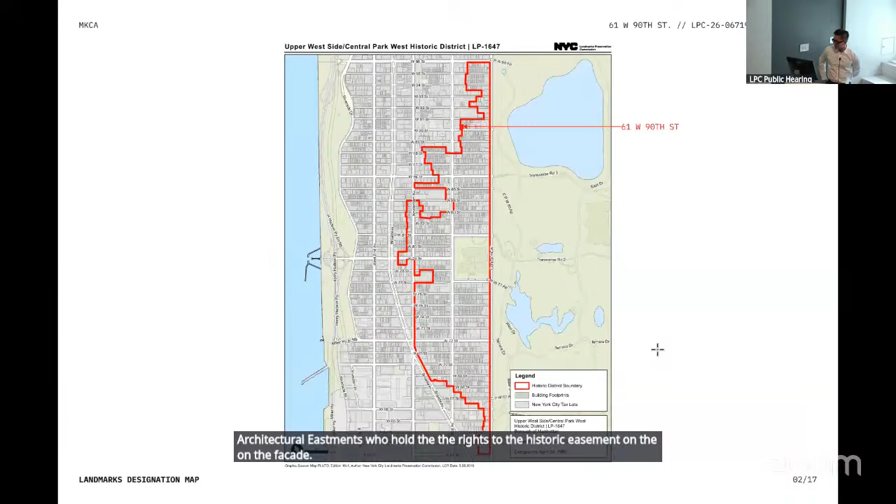The building is located in the Central Park West Historic District, between Columbus and Central Park West. Here it is in context.

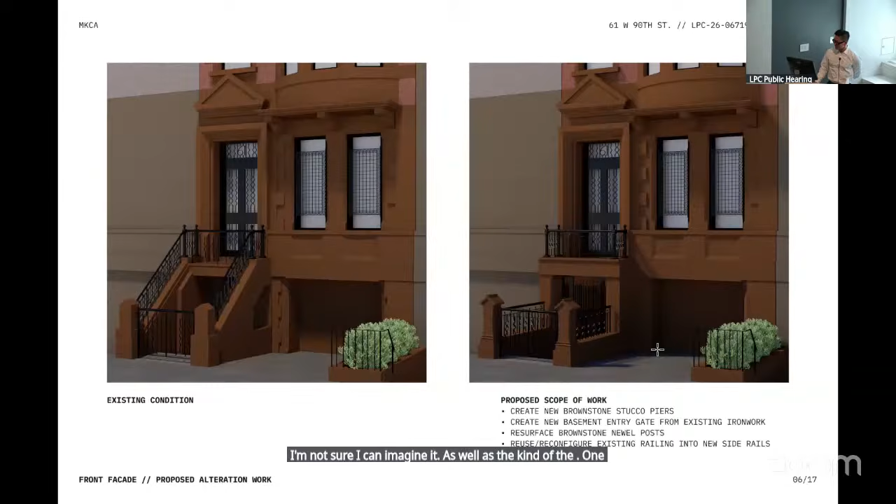So this is the proposed scope of work on the right, a comparative rendering of the existing condition on the left. We're proposing to remove a portion of the extant cheek walls and to restore the newel posts to a geometry that's much closer to the original condition, and to repurpose the original elements of the ironwork that remain into a new railing, running along retaining walls that will lead to a vestibule entrance.

Part of the impetus for this is in part to address this rather peculiar condition at the street, but also to bring the building into greater harmony with its surrounding neighbors, all of whom have basement level entries with low retaining walls and ironwork flanking them.

To go into a bit more detail into the proposal, this is the portion of the cheek wall that we're proposing to remove on either side of the railing. You can see that it's entirely a stucco construction.

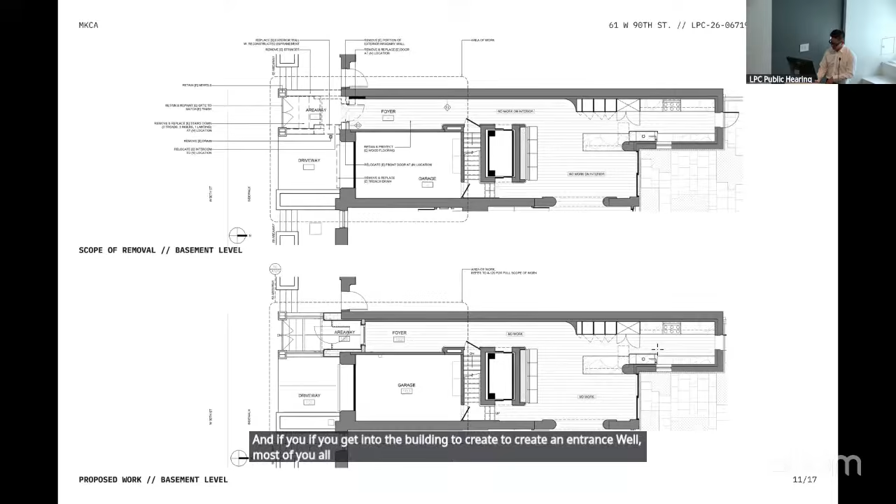And then no changes at the existing parlor level. Again, a comparison—the existing condition on the left and the proposed on the right—and I'll zoom in to the proposed geometry.

You can see that we're proposing to re-articulate the brownstone newels on the street, retain the gate, and the new ornamental grille or gate that is at the vestibule is an open air gate that creates a kind of buffer zone at the street level.

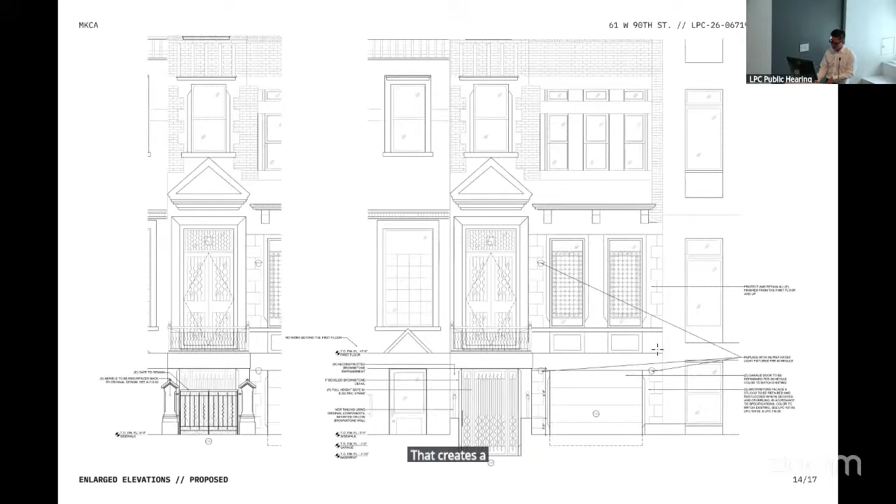And again, just an enlarged plan of the proposal. We're also working with the staff to rework the sidewalk stair down to the basement level to bring it into conformance with the correct proportions of the stair for egress. And I'll be reworking a lot of the subsurface drainage out here, which is pretty badly degraded.

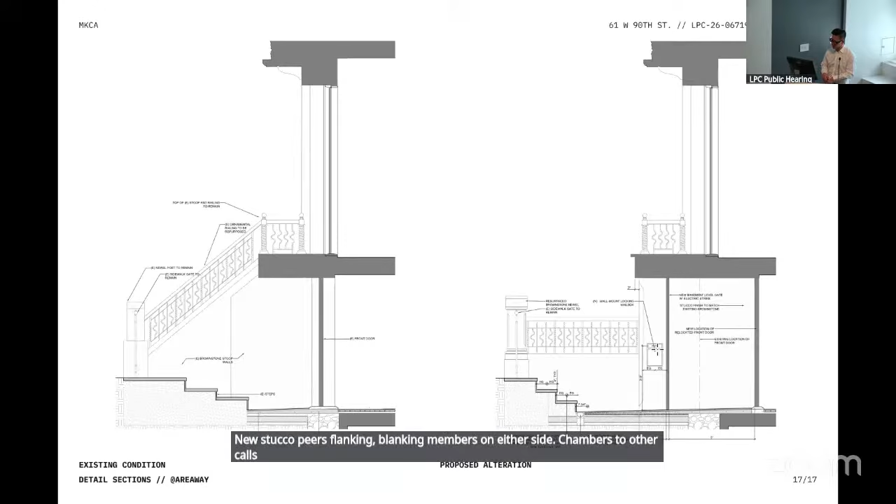And then again, a detailed series of sections through the existing condition and the proposed, and then sections through that entrance. As you can see, the recession of the front door, just to repeat the new open air entry gate, and then new stucco piers flanking the entrance on either side with a chamfered detail that recalls the chamfered corners of the rest of the building.

Those are the items. Thank you. Commissioners, do we have any questions?

Commissioner Chu: Yeah, so Michael, you can't do the traditional come around under that condition because the garage is there and you can't get down low enough on the side. So a lot of the other houses have obviously lost their stoops completely. What you're proposing is just essentially keeping those two pieces on the street edge to recall the remnant of a stoop that was there. Right. Okay.

Okay, thank you. Any other questions? Okay, is there anybody in the room who would like to speak on this item? Noting that there isn't, I'm going to turn it over to Stephen Thompson to see if we have any remote testimony. Those joining via Zoom who wish to speak, please raise your hand.

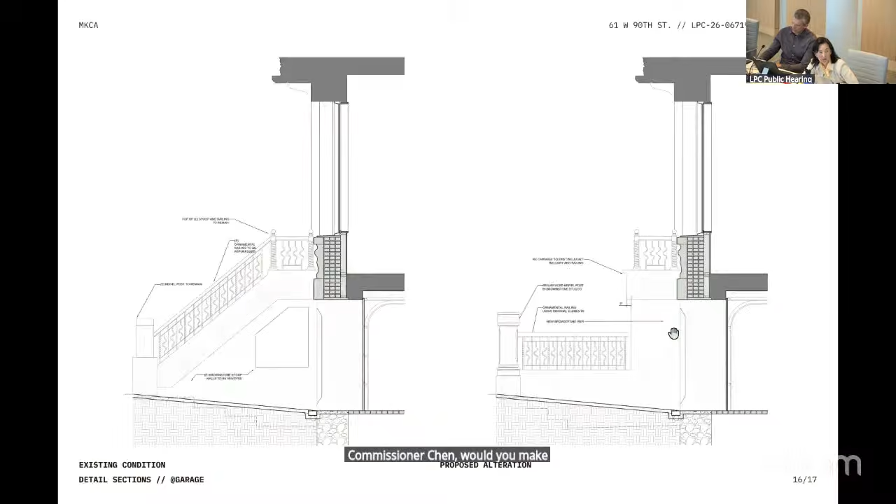Thank you. Commissioners, do we have any final questions? If not, let's go ahead and close the hearing. Commissioner Chen, would you make a motion to close the hearing? So moved. Thank you. Commissioner Mahan, would you second that? Second. Thank you. All in favor say aye. Aye. Any opposed? Okay, the hearings are closed.

Let's go ahead and start the discussion. Commissioner Wilder, would you like to start this discussion? Thank you for the presentation.

I think the work that's being proposed is taking away the form of the former stoop that used to be there and creating more of a traditional entrance at this basement level. From what I understand, there's not much more that's being changed, so we're really focusing on the alterations made at this level. I don't see an issue with the changes being proposed.

I think the newel post is fine to be restored to how it used to look. And so we're really just focusing on these cheek walls that are being removed and the railings that are retaining the existing design, or actual railings, and being repurposed. So overall, I can find it appropriate. Thank you. Commissioner Kumbe?

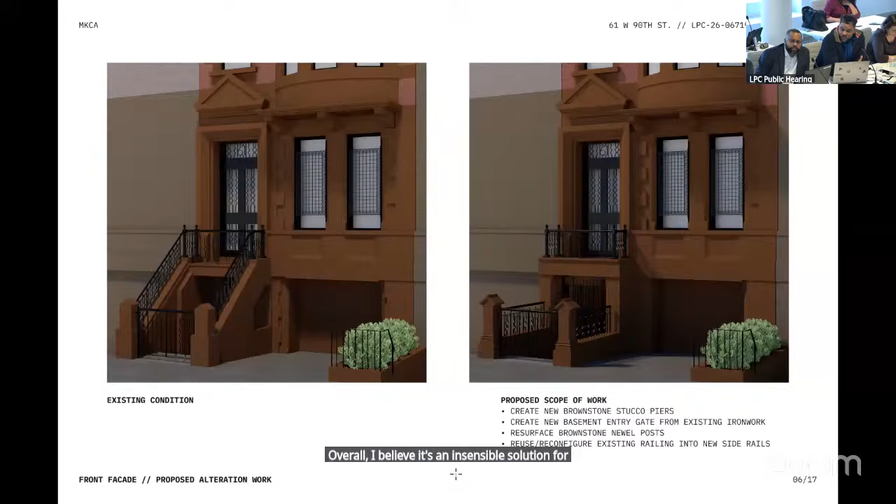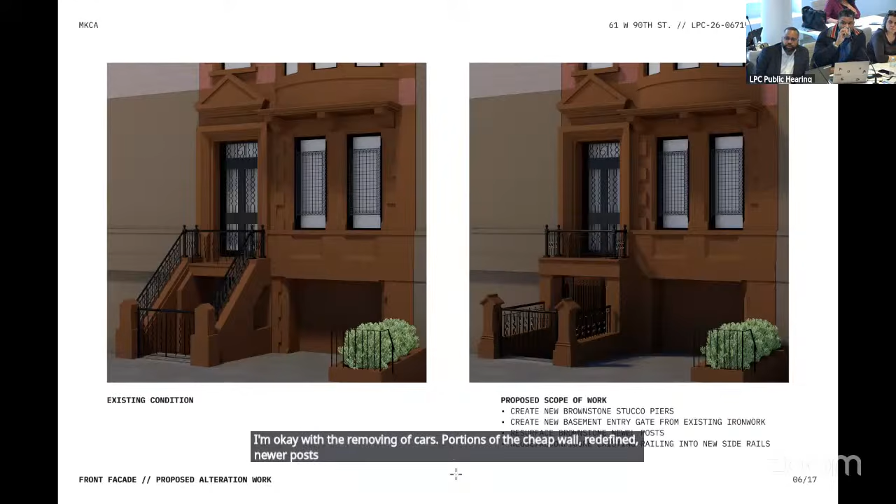Overall, I believe it's an acceptable solution, even at a designation odd condition. I'm okay with removing portions of the cheek wall, redefining new newel posts, leaving the existing gate in place. I find it appropriate. Thank you.

Commissioner Chu? Yes, I'm in agreement, I think this is appropriate. Thank you. Commissioner Jefferson? As the applicant said, a suitable approach. Appropriate. Thank you. Commissioner Goldblum? I agree. Commissioner Chen? Commissioner Mahan? Okay. Commissioner Wilder, would you like to read the motion?

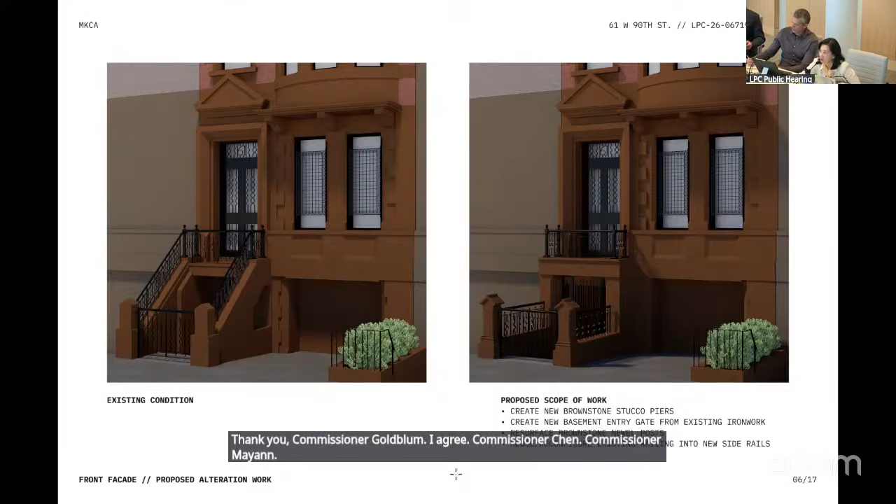Sure. In the matter of LPC-26-06719, 61 West 90th Street, Upper West Side Central Park West Historic District, a Queen Anne Romanesque Revival style row house designed by William F. Burroughs and built in 1885 to 1886. The application is to modify the stoop and basement level entrance.

I note that the building scale, style, materials, and details are among the features that contribute to the special architectural and historic character of the Upper West Side Central Park West Historic District. I recommend approval, finding that the historic stoop and entrance have been highly altered and cannot be restored to their historic configuration without extensive exterior and interior modifications.

That the house is located between two houses which no longer retain their stoops. Therefore, the removal of sections of the historic stoop wall remnants and metal railings at this row house will not diminish the unity of the row. That the proposed composition, including a shallow balcony at the former parlor floor entrance, will be in keeping with typical early 20th century alterations sometimes found at houses of this style and age, while supporting the historic...

Hierarchical organization of the facade.

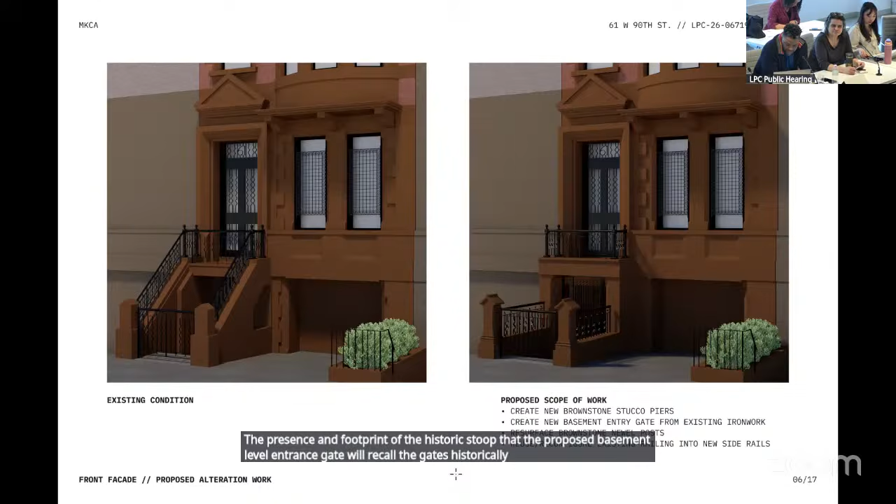That the integration of sections of the historic metal railings and the lower sections of the brownstone stoop walls into the redesign will retain portions of the historic fabric and recall the presence and footprint of the historic stoop. That the proposed basement level entrance gate will recall the gates historically found at basement entrances of houses of this age and style in terms of its placement, material, finish, and details.

That the newel posts will be resurfaced and resculpted to closely replicate the historic posts in terms of overall design and silhouette. That the brownstone tinted stucco steps and bluestone paving at the basement entrance will be in keeping with areaway paving and steps throughout the historic district, and that the work will not detract from the special architectural and historic character of the building, streetscape, and historic district.

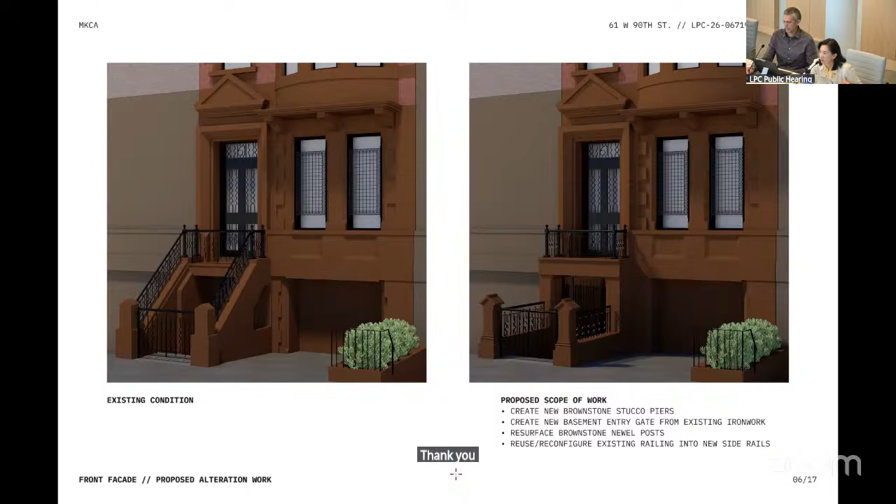Thank you. Commissioner Kumbay, would you second that? Second. Thank you. And Mark, will you call the vote? Vice Chair Master, aye. Commissioner Chen, aye. Commissioner Chu, aye. Commissioner Ginsburg. Commissioner Goldblum, Commissioner Quimby, aye. Commissioner Jefferson, aye. Commissioner Mann, aye. Commissioner Wilder, aye. With 8 in favor and unopposed, the motion passes.

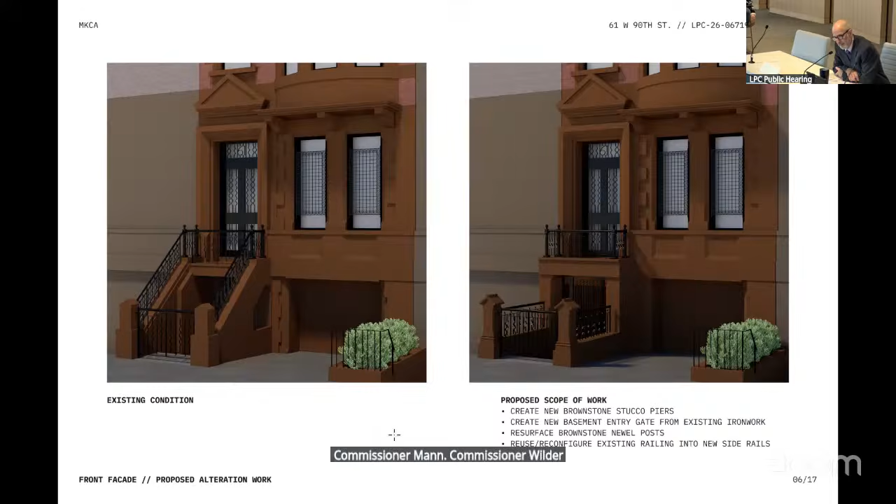That's been approved. Let's move to the next item. Next item is public meeting item number 3, LPC 25-07016, an application for a certificate of appropriateness in the Borough of Manhattan, Block 474, Lot 19, 41 and 43 Mercer Street in the Soho Cast Iron Historic District. This is a store and storehouse building, number 43, designed by Henry Fernbach and built in 1868, and a one-story garage, number 41. The application is to demolish the garage, number 41, and construct a new building, to remove the party wall and combine the buildings and replace storefront infill and construct rooftop and rear yard additions at building number 43.

This was last presented at the public hearing of February 24th, 2026. No action was taken at that time. The applicants will present revisions to the proposal in response to your comments after we open the proceedings.

Commissioner Wilder, would you make a motion to open the proceedings? So moved. Thank you. Commissioner Kumbay, would you second that? Second. Thank you. All in favor, say aye. Aye. Any opposed? Okay, the proceedings are open. You may begin. Thank you.

Hello, Commissioners and Landmark staff. Thank you for hearing this application this morning. My name is Jackie Pudu-Vallon, JPD Preservation Consulting. I'm here today with the architect, Alexandr Neratoff.

I'm not going to repeat everything that Corey just said. Commissioners last saw this application on the 24th of February. The project is a proposal to demolish an existing one-story garage and to construct a new building at 41 Mercer. And at 43 Mercer, additions and storefront alterations are proposed at the existing building. These buildings are to be combined at the interior. At the public hearing, a couple commissioners were not present, so we will briefly review some of the background information on the proposal, in addition to discussing the changes that were made in response to your comments.

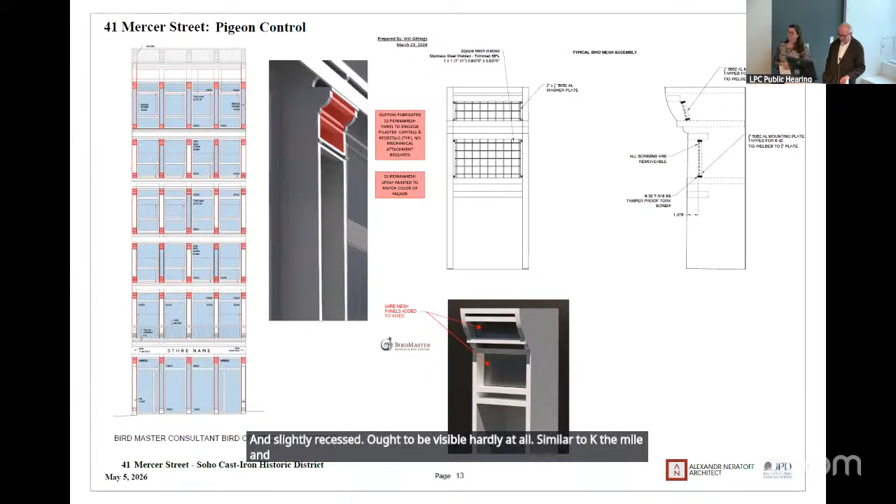The third concern commissioners expressed was bird proofing, even though Soho surprisingly does not have many pigeons. I lived there, there are very few, but it could happen. So we looked at electric strips and gel packs, all of which do long-term damage to metalwork on the facade. We found a slightly recessed grid, 1/2 inch to 3/4 inch, in stainless or stainless with a vinyl coating so it becomes dark and slightly recessed, not visible hardly at all, similar to the nylon netting used over carved stone facades elsewhere.

So the effect of this on the 41 Mercer side, that's how it looks in rendering. On the 43 side, which we'll get into, this is also all you see from the street. None of the addition above 43 Mercer is visible from Mercer Street, except along that view corridor.

Regarding 43 Mercer, the first direction set by the commissioners was to refine the atelier window details to be simpler and more industrial, and to reduce and simplify the rooftop addition. We made the atelier glazing pattern taller and narrower, extending it all the way up. We eliminated the upper level of the addition by removing the stair and elevator bulkheads and the outdoor kitchen. We pushed back the pool, all of which was a fairly difficult change because the functions were either lost or had to be pushed into the 41 penthouse side.

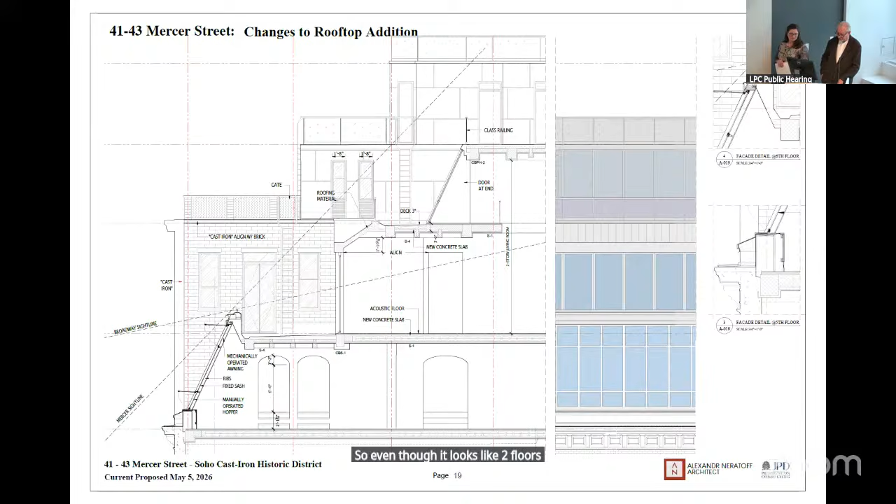We lightened the details on the two upper floors, which are really a facade for a two-story living room. So even though it looks like two floors, it's really like a floor and a skylight. You see in section there's a vertical space behind it.

Keep in mind that everything above the atelier window is seen 270 feet away, 75 feet lower than this, and it's viewed through a glass wall and eight trees. So there's really very, very little that you can understand from this, the only distance that you could see this.

The atelier window changed the proportion of what would be seen as an early 20th century volume, while simultaneously lightening it and reducing the relative size and complexity of the upper one-and-a-half effective floors. No one will see this view except from a drone with guidance, but anyhow, you see the relative proportion will change.

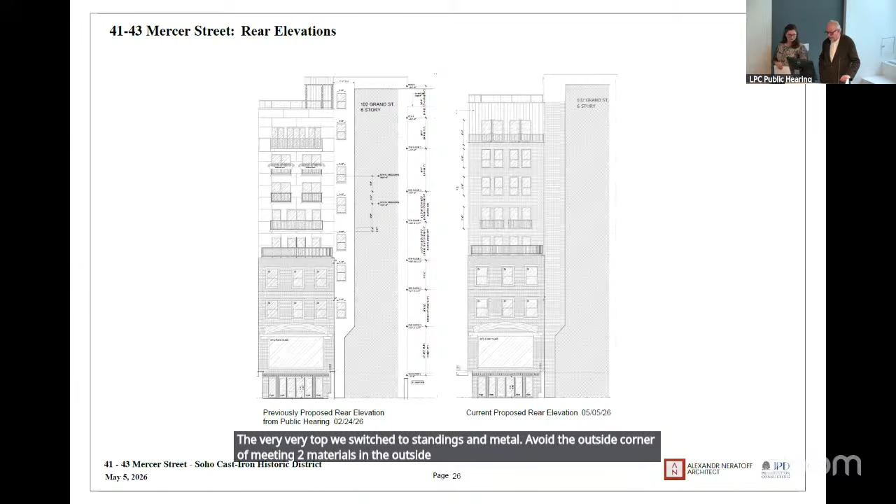So a much lightened look, but it looks more traditional.

The storefront: one of the recommendations commissioners made was the addition of the bulkhead. Some other comments were about getting rid of the side lights on the original doors and simplifying and filling up the gap above the store name.

Underneath the cast iron arch lintel, which we think is there—you see a little evidence of it—it's been filled in with some brick. So we extended the columns vertically up, extended the front portion up, pushed the pilasters to the side a little more, and now we have single doors in the two openings. Much simpler.

And the same view, but in a rendered form, before and after.

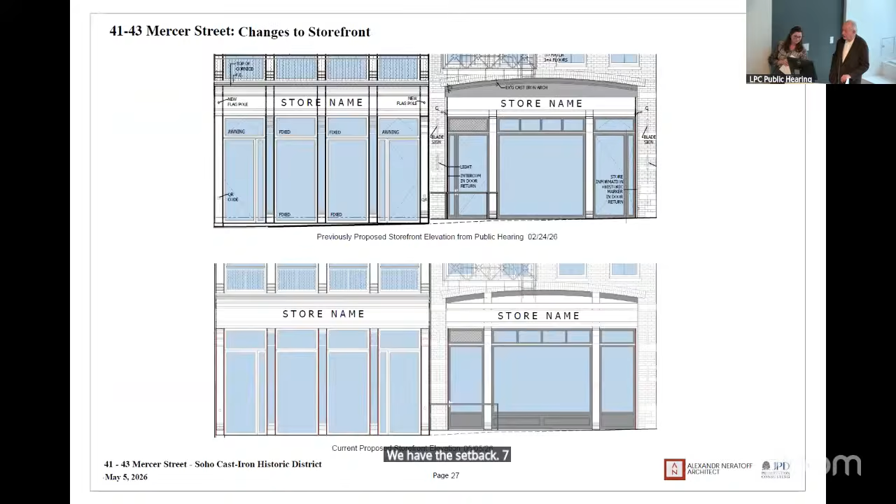Well, for zoning reasons and also for proportion of facade reasons, we have to set back the 7th floor level. So it's a two-story penthouse, clad in the same material. The upper one is set back because it has to be much smaller, since it needs to be less than a third of the roof square footage. So it's set back a little further than the 7th floor.

Actually, you know, it's relatively simple. There were also fire department requirements, and we needed space for the mechanical equipment. We lost the bulkhead on the 43 side, pushed it everything into 41, so we had a smaller footprint to work with for mechanical equipment.

At an angle, again from the street, it's really not visible. So it's prominent here, but if you look at the study we did—a Google satellite study of Soho—every second building, if not 2 out of 3, have additions that are enormous.

Soho being what it is, narrow streets, continuous streetscape, it is unusual that all the additions on top are not visible on the street. So following that pattern, what we propose, I think, is fairly delicate compared to what else is up there.

You mentioned the rooftop mechanical equipment. Does that not need to be screened by current zoning? We don't think so. It's partly screened. There's a glass railing around the perimeter, so I don't think it needs to be screened to the full height.

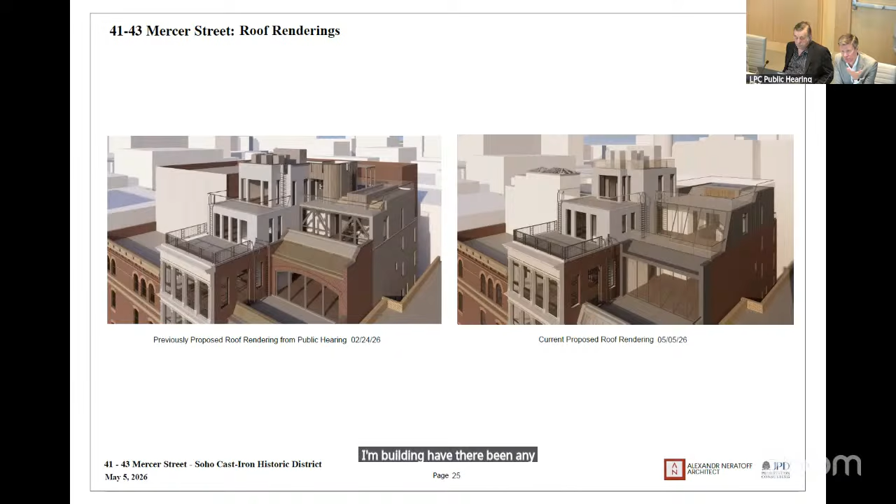At the public hearing, I remember your presentation clearly. It was very interesting, with all the various references to art and artists in the neighborhood. There was some discussion about the profile, the detailing, the design, the opaque versus transparent character of the pilasters in the 41 building. Have there been any revisions or refinements to that element?

No, we maintained that portion. Transparency is something somehow associated with a more modern view, and our encrypted classical version is really the fin. So theoretically, everything except the fin is modern. We don't take credit for that—maybe take credit for identifying it—but really Soho, historically, evolved from imitative work to a more modern version of itself. Later Soho buildings use the pilaster as an encrypted form of classicism on a budget. So we based our idea on this more modern view of late Soho architecture versus early Soho.

Any other questions, commissioners? Commissioner Jefferson? I understand the penthouse on the roof, but I'm a bit concerned about the scale of it, and my computer's not working right. What's the scale, floor to floor, of each of those penthouses?

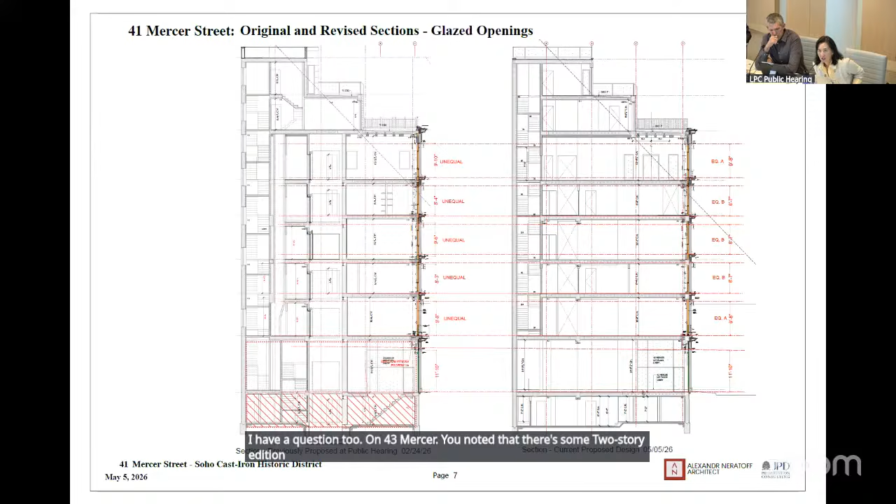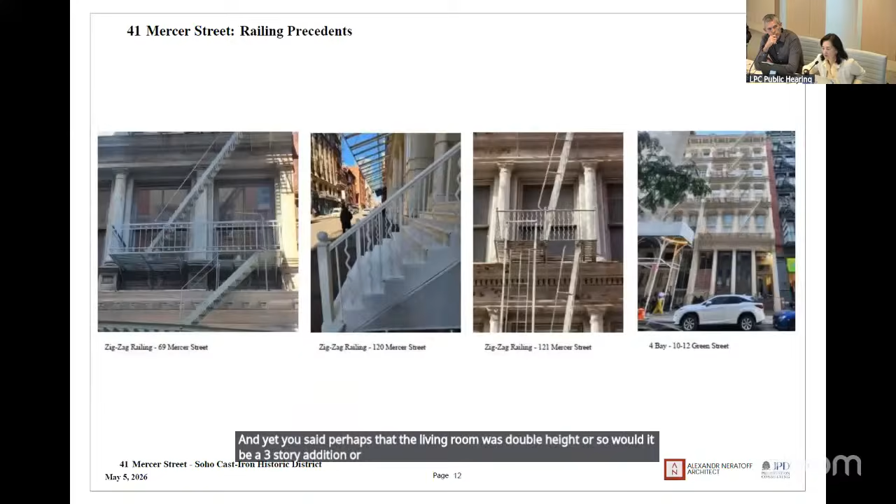I have a question too. On 43 Mercer, you noted there's a 2-story addition, and yet you said perhaps that the living room was double height, so would it be a 3-story addition? Well, it's the 5th floor—it's an addition, yes, but I'm considering it visually part of the historic fabric. So it's really a 2-story addition on top of that, technically speaking, a 3-story addition. The upper 2 floors, however, are a 2-story living room with a little mezzanine bedroom behind.

So even though it's broken up into a straight glass section and then a slanted glass section, behind it is a 2-story living room. Because the upper floor is slanted, it really is a skylight—it looks like a skylight and functions as a skylight to a 2-story space.

Thank you. Commissioner Jefferson: You're essentially not adding floors, you're creating larger spaces within the so-called addition—am I reading that right? On 43, well, that's all new, yes, everything above the red is new. If you have a floor and then the space becomes double on the inside, you're creating a new space inside, correct? Well, that is new space, yes, but it's a tall new space.

This is where the grand stairway to the upper floor is, and on the rear portion is a bedroom. So you're just trying to imagine this is a mansion, really. Yes. It's not just a floor added that's subdivided—you're adding a mansion of spaces. Yes, we are. This is new space. Okay, thank you.

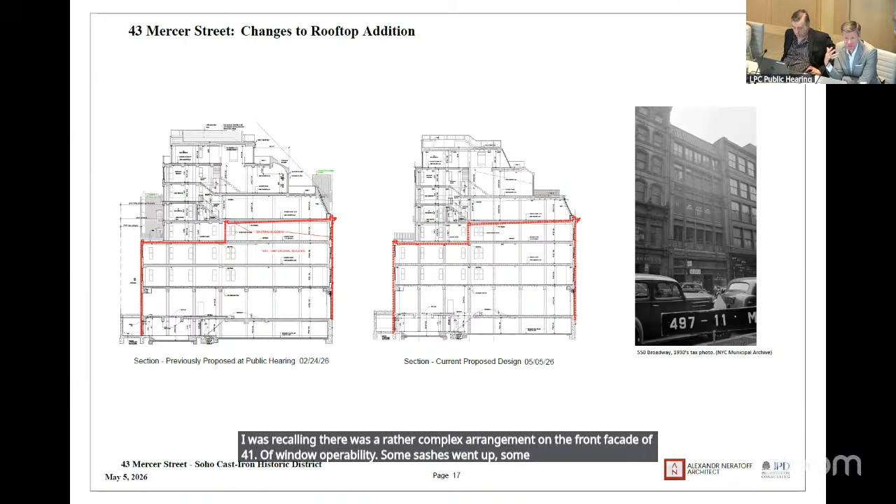Commissioner Mahan, and then Commissioner Chu. At the public hearing, I was recalling there was a rather complex arrangement on the front facade of 41 with window operability—some sashes went up, some sashes went down, some other things like that. I don't quite recall exactly. Has there been any refinement or changes to that?

Yes, it's simplified. Windows 3, 4, and 5 are really double hung windows with unequal height sash, but they're double hung windows. It so happens that the 4th floor one can actually move up instead of moving down. On the other two, the upper sash moves down. But that's a characteristic of double hung windows, traditional or new ones.

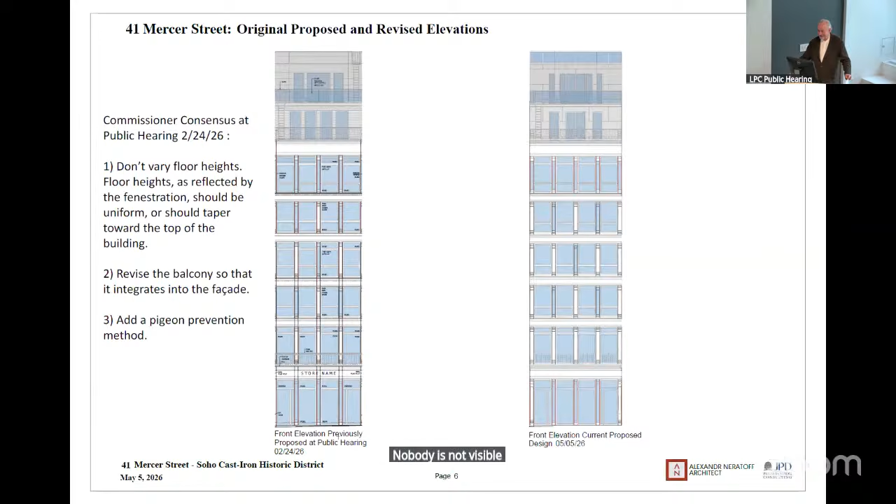They're still not consistent operation. No, but it's not visible. They look exactly the same. Wouldn't it be visible in the open condition? The open condition, yes.

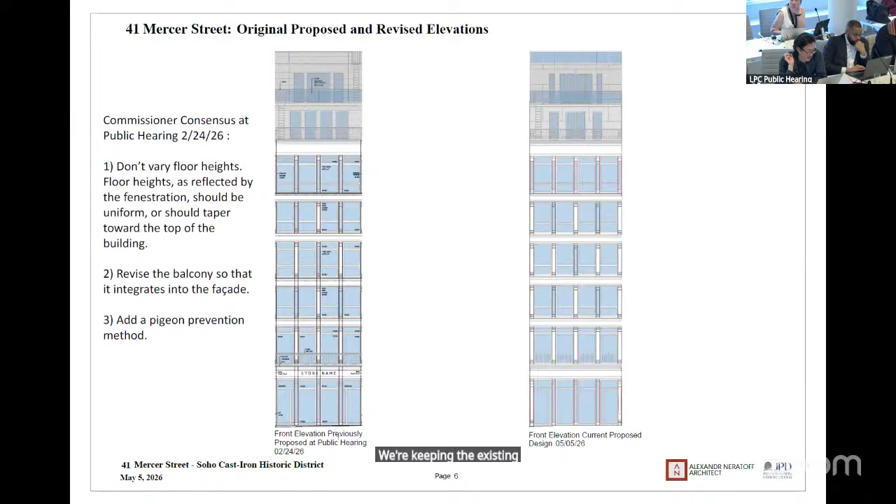Thank you. I missed this on the first public hearing, but I did have a question on 43. We're keeping the existing building facade and structure. I'm just trying to understand the exact scope. The 43's facade is being kept. All the exterior walls of 43 are being kept.

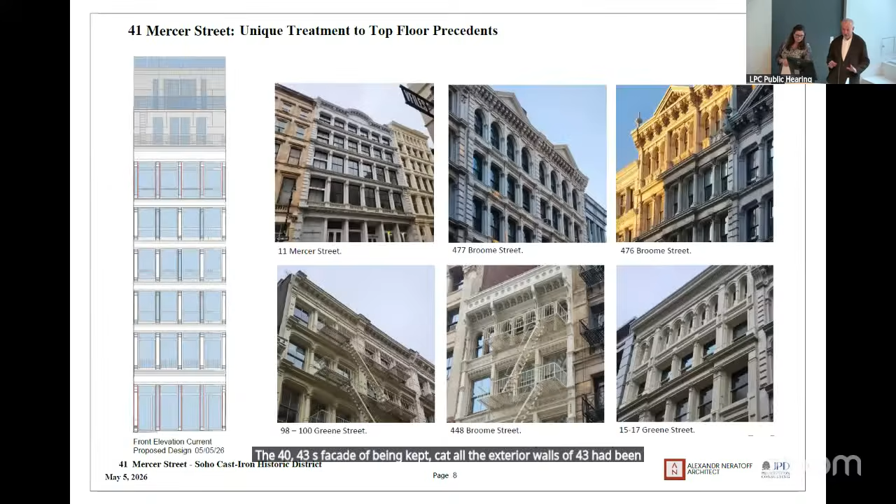Sort of, because the back of the building, the existing building is three stories in the back, four stories in the front. Correct. So we're filling all that in with a totally self-supporting new structure that's not touching the existing one.

Okay, and then in plan, I didn't see a plan. Are the two lots linked or are they separate units? They're linked, 41 and 43. The south wall of 43 right now is in very poor condition. We are replacing it, but we are replacing it with a poured concrete wall that happens to be our shear wall in the building.

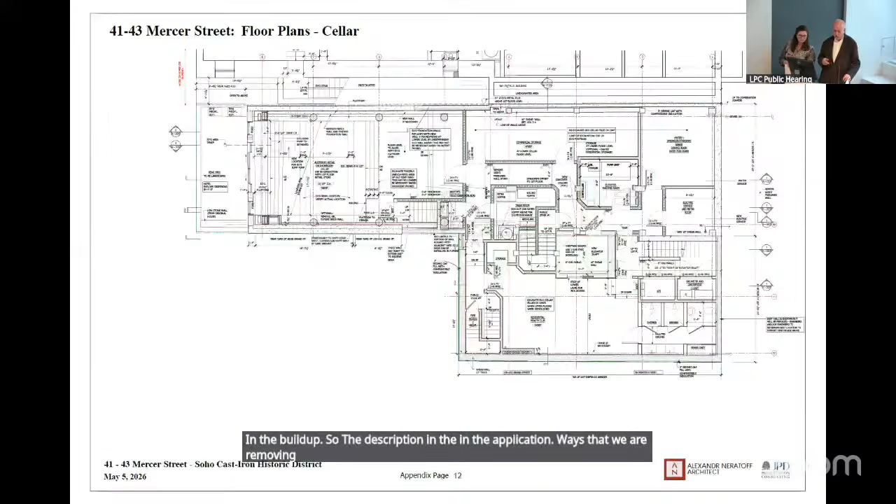So the description in the application reads that we're removing that wall. We're removing and replacing that wall with a solid concrete wall. So the wall that's between the two buildings, next to the elevator, that runs towards the street, that's a new, very thick concrete wall.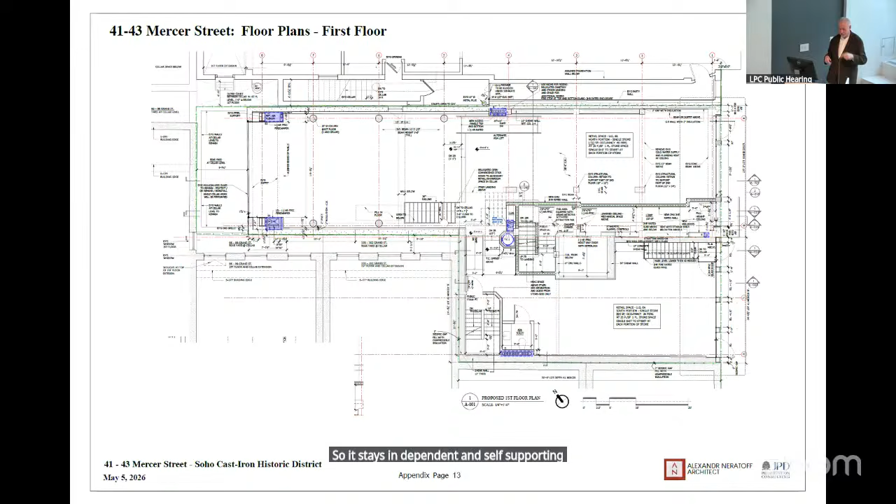The party wall. It's a party— it was never a party wall, it's actually a double wall always. Right, it's now becoming a very thick concrete wall that replaces the existing brick bearing south wall of 43, and therefore it maintains the rigidity of the 43 Mercer facade. So it stays independent and self-supporting, and the structure bypasses all the historic fabric of 43.

Okay, so the units actually connect through. Yes, okay, they go all the way through. Okay, thank you. Any other questions?

Okay, so let's go ahead and start our discussion. Commissioner Goldblum, would you like to start this discussion? Sure.

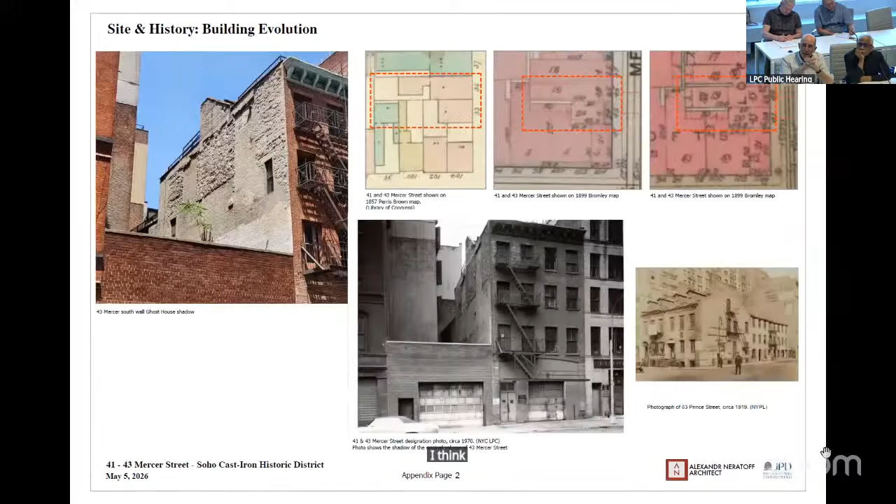It remains an interesting application. I think that it's generally appropriate. I think that the improvements to the storefront on the right side building are good, simplified, more distinct from the left side building. I think that the argument about regularizing the floors

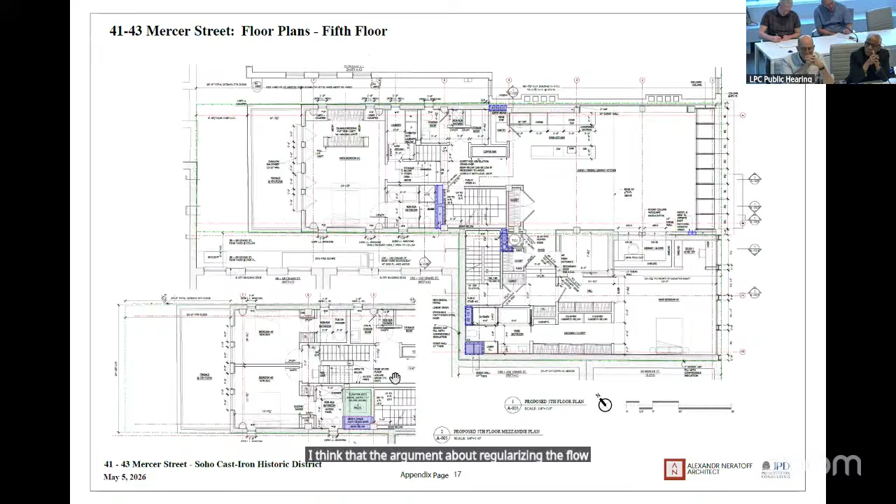works except for on the top floor. The examples shown of other buildings that had taller top floors had top floors that had a very distinctly different design to them—arched, or smaller proportions, or bigger. There was something very, very different about them. This particular design is drawing on a much different strand of the Soho universe, where I think that top floor just looks odd because its design is the same as the lower floors, but the proportions just kind of go in a different direction. So given that the design is the same more or less as the lower floors, I think the height should be the same as the lower floors as well.

I think that the rear facade of the right side building is much improved and is appropriate as is. I think that the north light design is improved as well. My only suggestion, happy to hear what others say, is I think that the tip-top floor of the right side building, which is that double height space, could be pushed back further. I think our general policy has been to try to keep rooftop additions to the minimum, and it seems like for a grand stair double height thing, it probably could be reduced without harming anybody, and it would just be more in keeping with other approvals.

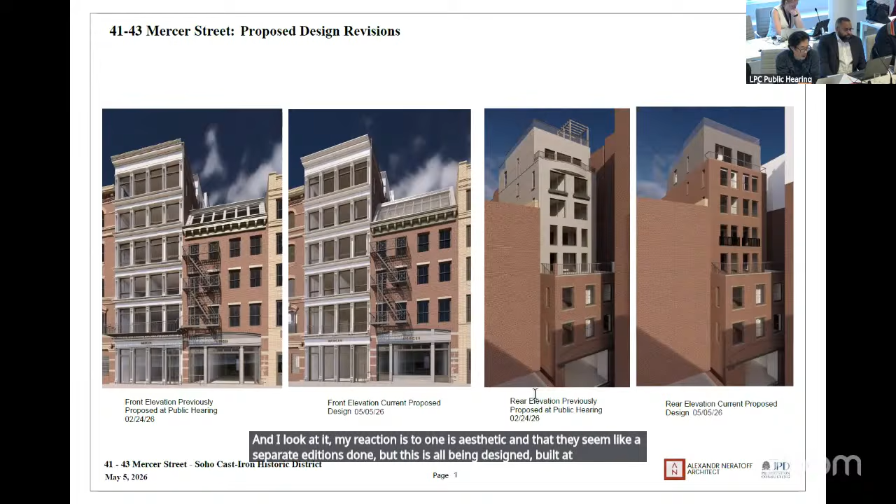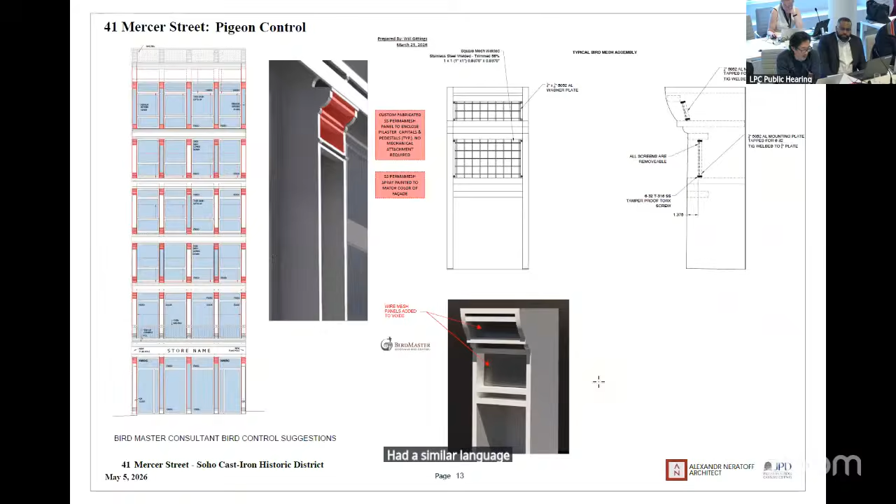I do think that since this is essentially more or less a new building while retaining and restoring the facade, the additions being the mansard roof or mansard floor, as well as the double suite on top, would from a design perspective be more aesthetically in keeping with each other. My reaction is twofold: aesthetically they seem like separate additions, even though this is all being designed and built at once. I actually preferred the simplicity of a precedent that was shown, I think it was 53 Mercer, where the two-floor addition had a similar language. It felt like a unified addition to an existing building, which in fact is what this situation is. I think this one is overcomplicated in its profile and detailing.

I also think that it is slightly too prominent in mass. I would leave it up to the applicant to find a solution to either simplify the facade or its sense of mass. I think Michael's comment about pushing it back makes sense to me. I think that's one way to do it. It's sort of like they created a courtyard up at the top. I would just get rid of the front piece and push it back and keep the same sloping language that the mansard below has.

And pushing it back would reduce its visibility as well. Other than that...

I do appreciate a slight modern interpretation of the cast iron facade. The fin language is interesting but curious to me. Some renderings, I just think this needs to be checked very carefully from a detail perspective, because some of the plate conditions could look quite messy in actual realization. I also am not a big fan of putting netting inside those reveals. I think it's going to look terrible. In that situation, I would propose putting a plate that sets back and just having it consistent with the aesthetic of the whole detail. Those are my comments.

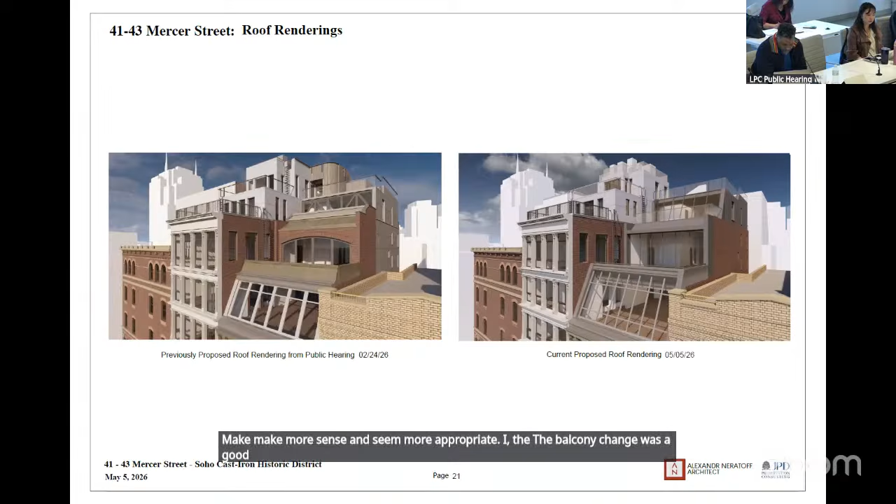I agree that the storefront changes at 43 make more sense and seem more appropriate. I agree the balcony change was a good move, as well as the design of the rooftop addition and simplifying it, making the overall design a little more cohesive than what was there before.

I think I do have a problem with the overall height, as it does almost seem as if it's doubling the existing building. So because it is a double height space, there is some room to reduce the height, and I would suggest that the applicant take a look into that. Those are my comments.

Thank you. Commissioner Ginsberg? So in general, I agree with my fellow commissioners. I think Commissioner Chu's suggestions are pretty much in line with where I'd be, except I don't like the column detail, the idea of the plates. The mesh may be all right, but I also don't think it'd be the end of the world if it was back to what was originally, and potentially put spikes to prevent birds from nesting, or just let the birds...

nest. I'm not sure that's so horrible. It's probably not big enough for hawks, which I know is what the city birders really like. But I just think the solution may be worse than the problem. So following largely what Commissioner Chu and my fellow commissioners said, I think we can get to a good solution.

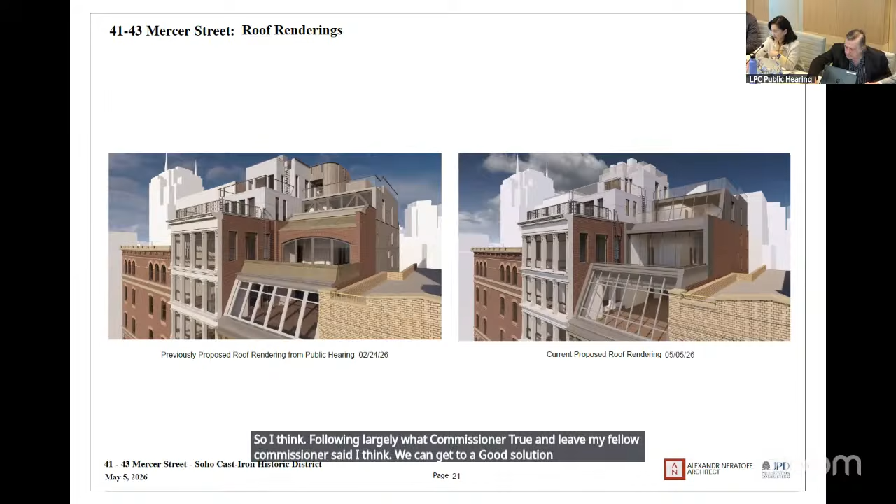Thank you for the presentation and the revisions to simplify the design after the public hearing. I struggled with this application last time, and I continue to. And for me, it's about more fundamental issues than, let's say, the birds, to pick on one example.

I fully support and want to see new development in historic districts, and I think the contemporary interpretation of historic architecture is an entirely appropriate way to do that, if not the only way. I struggle with the way that approach is executed in this proposal. I find it to be neither contemporary enough nor historic enough, and I find the contemporary interpretation to be a kind of misinterpretation of Soho architecture.

Perhaps I don't know how many folks spoke about the bird issue at the public hearing, but my issue was with the geometry and the expression of the pilasters, not so much whether birds could roost within them or not. There was a kind of another building's profile that was scanned, then scaled, adjusted, and interpreted. The relevance of that other building's profile I find questionable. And then what is the result? I think the amount of interpretation perhaps is not enough, or perhaps the source material is not the right one.

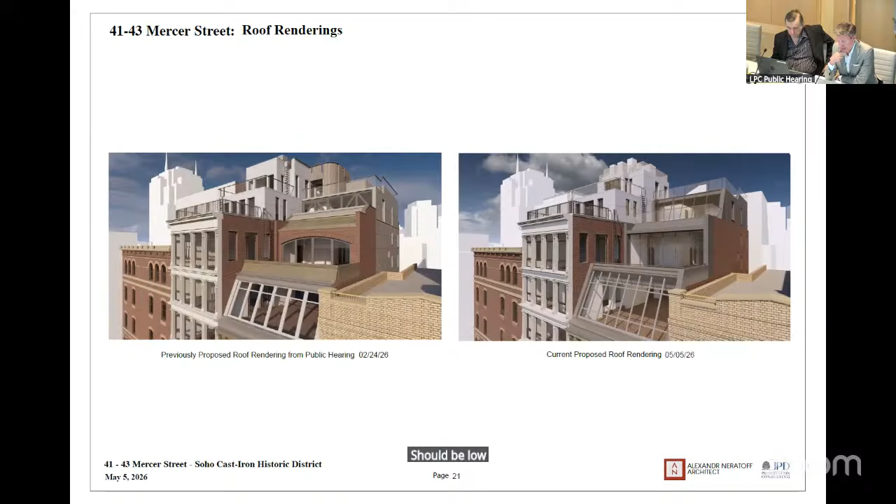As to the other issues mentioned by the other commissioners, I agree the top floor of 41 should be lowered to match the floors below it, while I'm okay with the second floor being taller. I find the rooftop accretions of both buildings to be problematic. I think there's too much on 41, and when all is said and done, the mechanical equipment, somewhat oddly behind a glass rail, is going to be fully enclosed because of zoning regulations, and this building is going to look even taller. And then I think the rooftop addition on 43 is too much and should be reduced in scale via the elimination of one or more floors. The rear facade is much improved from last time, and is okay as is.

Thank you. And Commissioner Chen? Agree with many of the comments of the fellow commissioners. I thank the applicant for refining and listening, but it's not quite there yet.

I have no problem with the rear facade, I think he made a nice improvement over it. I agree with the commissioners about the height of the second floor, it could be taller, consistent with the historic pattern in this area. What's been alluded to is obviously the top and the detailing. It needs to be tweaked and adjusted, and so I will not add to the difficulty, because there are many different permutations that can be derived, but I don't think the top is quite there yet, and I will not confuse the discussion any further.

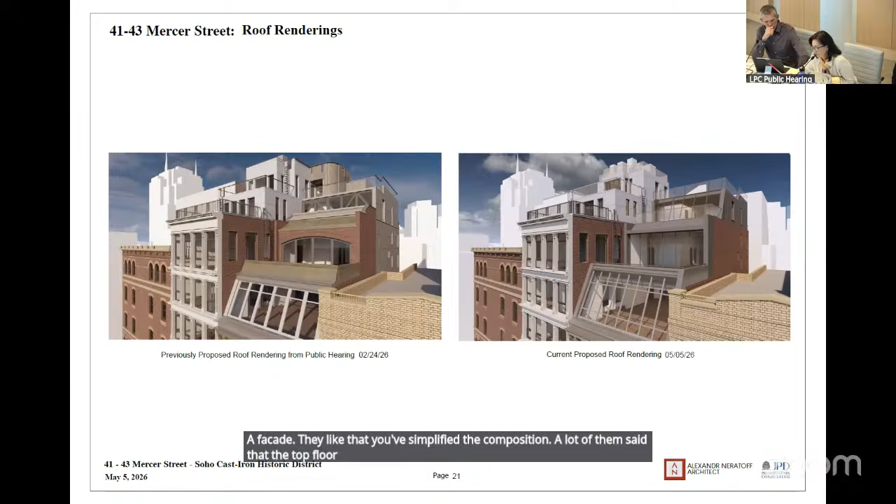Okay, so I think what we're going to do is take no action, but the commissioners have been very positive about the storefront design and the rear facade. They like that you simplified the composition. Many said that the top floor on 41, the height should be regularized. And a lot of the issues really surround the rooftop addition on 43 - whether it's being simplified, pushed back, or lowered by one floor. So perhaps you can work with staff and we can bring you back at a later time.

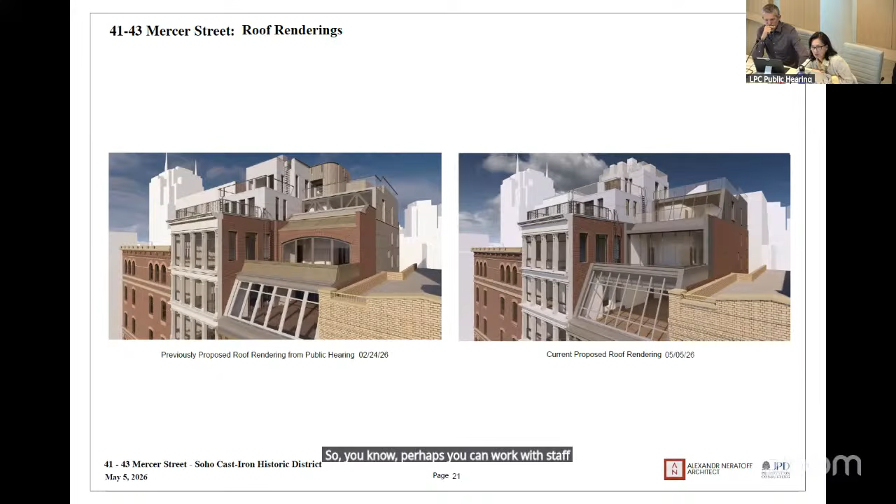Okay, we'll now move to our public hearing agenda, starting with public hearing item number one. It's LPC 26-08142, an application for a certificate of appropriateness in the Borough of Brooklyn, Block 241, Lot 123, 10 Pierrepont Street in the Brooklyn Heights Historic District. This is a neo-Renaissance style row house designed by J.C. Cady and built circa 1895. The application is to install an areaway lift and construct a rooftop bulkhead and railings.

Good afternoon, Commissioners. My name is John Shippers. I'm here with my colleague, Jen Balut. We're from Steeringhouse Design and Development, here to talk to you about 10 Pierrepont Street in the Brooklyn Heights Historic District. This is a project near and dear to my own heart. It's my childhood home, so I know it intimately. Jenna has done most of the drawing, but given my connection to the property, I'm going to present today, and she'll be on hand to answer any questions.

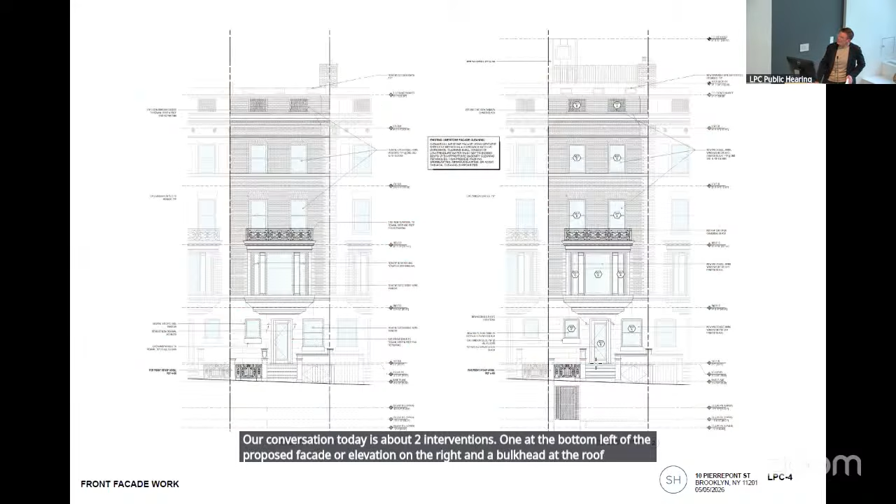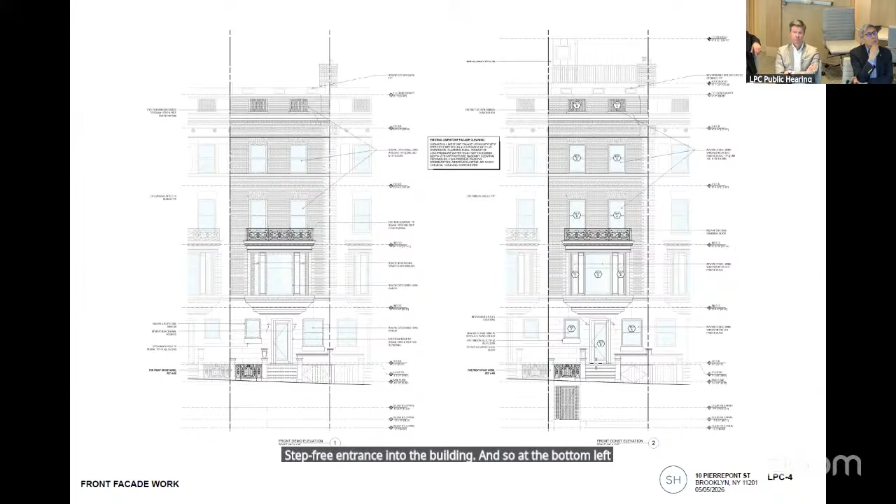And here is our proposed facade work. Much of the work is restorative and being managed at staff level. Our conversation today is about two interventions: one, at the bottom left of the proposed facade or elevation on the right, and a bulkhead at the roof. Let me point out that this is a non-traditional stoop condition on a row house, as there is not a traditional garden floor entrance. We're trying to deal with accessibility issues, because currently there is no way to provide step-free entrance into the building. So at the bottom left, we are proposing a mechanical lift providing access to the cellar level.

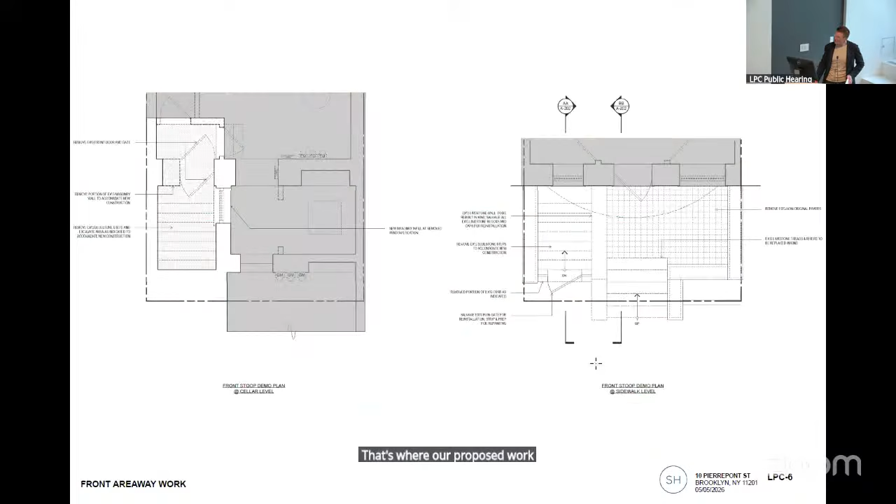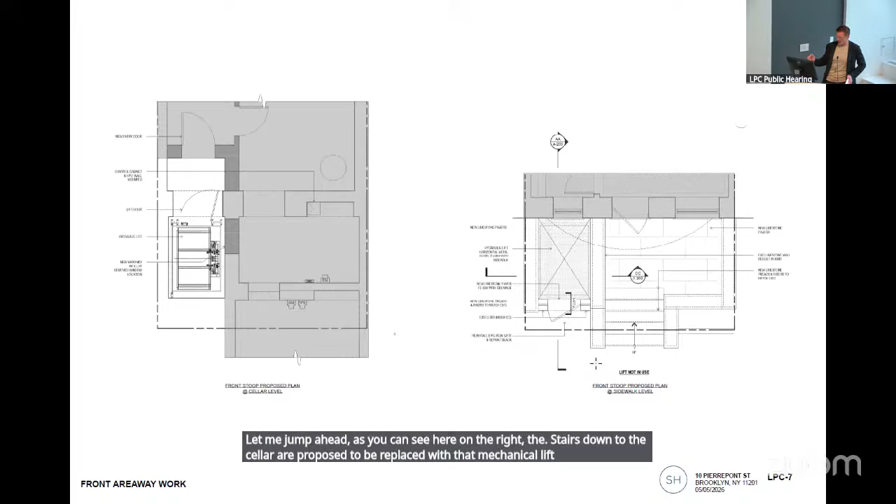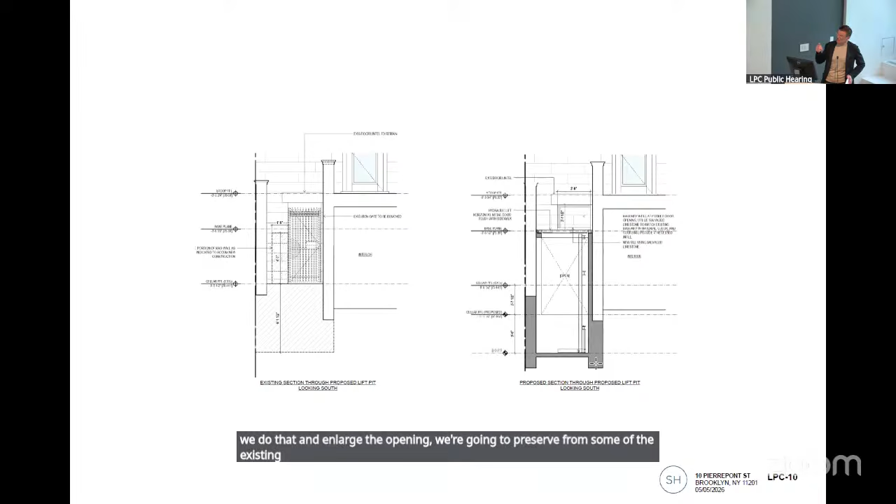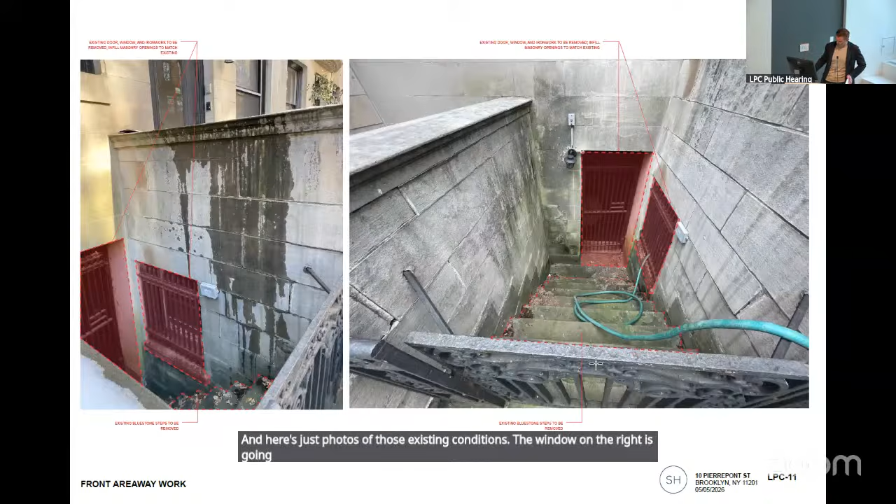Here we have a couple sections of the proposed lift, and additional sections. I'll focus on the drawing on the left — we do have to modify the existing door condition to the cellar slightly. As we enlarge the opening, we're going to preserve some of the existing facade material and use it as infill above, which I'll show you in a minute. Here are photos of those existing conditions. The window on the right is proposed to be infilled, and the door will be modified.

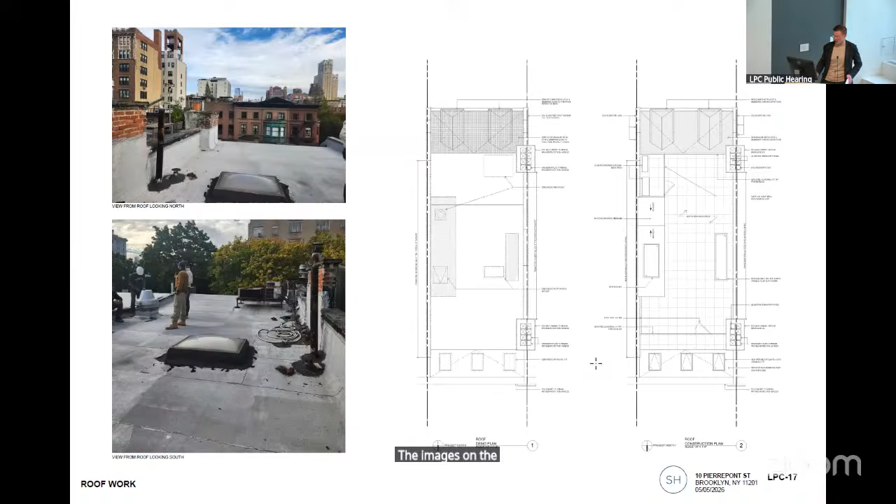Now we're turning our attention to the roof, where we're proposing a bulkhead. The images on the left are the existing conditions. Here are some drawings of our proposed bulkhead, the mock-up, existing conditions and sightline, and proposed sightline from across Pierrepont Street. You can see that the proposed bulkhead will not be visible. Here are the existing conditions with the mock-up in place — you can see the proposed bulkhead is not visible from across Pierrepont Street.

We are proposing the bulkhead in a sand color to blend in with the building behind, and the railing is proposed in black painted ironwork. The existing windows below the roof line have existing black ironwork on them, so we're just repeating that material and color above.

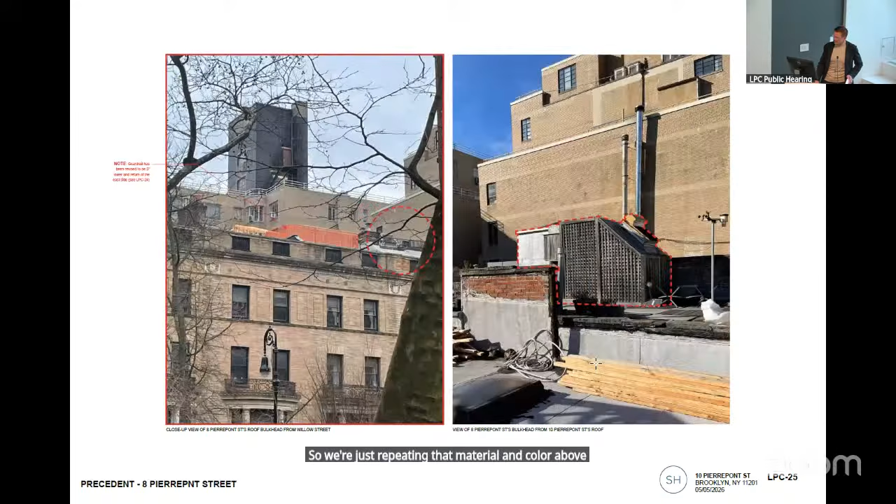The building next door, number 8 Pierrepont Street, has an existing bulkhead, highlighted in red there. There's also an existing railing, visible from the same vantage point down Willow. Here it is mocked up.

At staff's suggestion, we were able to lower the railing by a few inches. Originally we had proposed it at the same elevation as number 8 Pierrepont Street, but found that reducing it is possible while still maintaining code requirements and also slightly reducing its visibility.

For precedent, also on Montague Street about a block and a half away, there is another proposed visible bulkhead above the roof. That concludes our presentation, again showing the proposed lift on the left and bulkhead and railing on the right. Thank you.

Thank you. Questions? Commissioner Jefferson: On the visibility issue, did the community board approve it, or what did the community board think about the visibility issue?

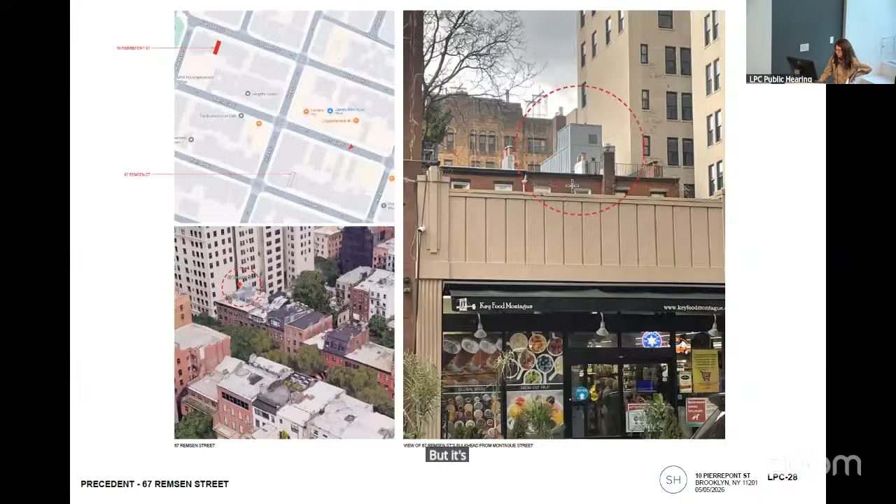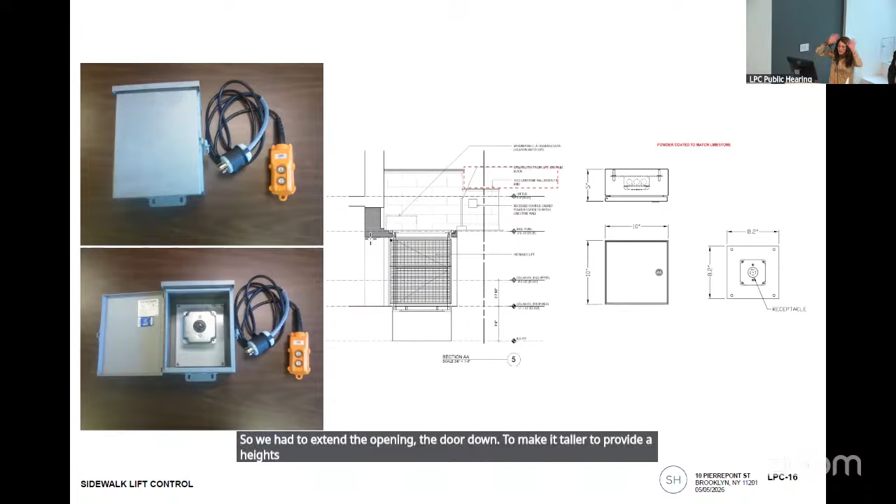Over here you can see we had to lower it because you're excavating down further for the cellar—correct, to the finished floor. The bottom of that is the door height. We had to extend the door opening down to make it taller, to provide head height, but we wanted to keep the impression of the existing door opening above, though it's still an infill of masonry. Precisely, exactly. Thank you.

Any other questions, commissioners? Okay, is there anybody in the room who would like to speak on this item? Noting that there isn't, let me turn it over to Stephen Thompson to see if we have remote testimony.

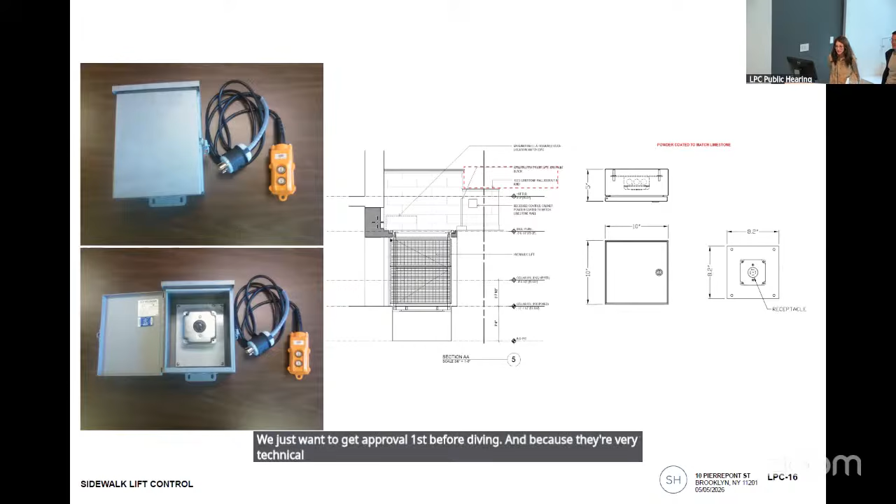Thank you. Commissioners, do we have any final questions? Okay, if not, let's go ahead and close the hearing. Commissioner Ginsberg, would you make a motion to close the hearing? So moved. Thank you. Commissioner Mahan, would you second that? Second. All in favor, say aye. Aye. Any opposed? Okay, the hearings are closed.

Commissioner Kumbe, would you like to start this discussion? Sure. Overall, I'm finding what is being proposed to be appropriate. It looks like in order to introduce this lift, it's very minimal from a visual perspective. And I can understand including this blind window to maintain the character of an existing opening, even though it's no longer being used in that manner. I agree that the applicant should work with staff just to make sure all the detailing actually works well.

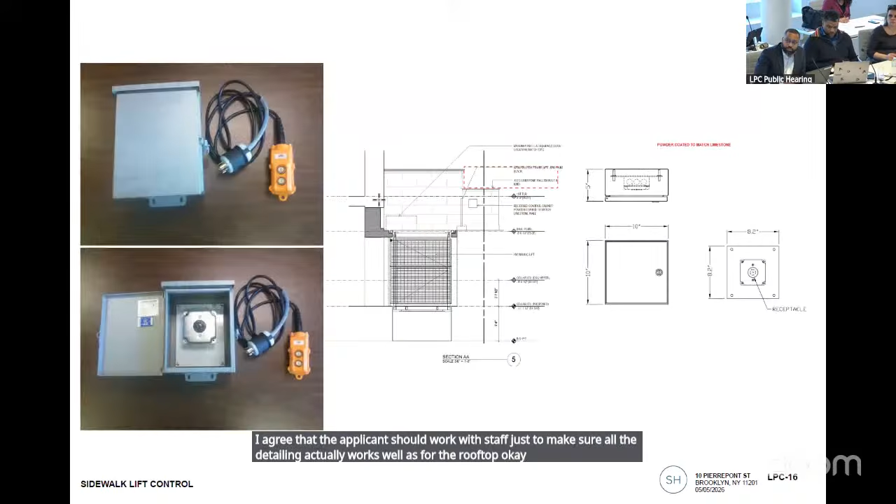As for the rooftop bulkhead, I find it appropriate. It's modestly scaled just for its use. And even in the materiality, just trying to make it blend in more into the background. I also find the railing to be fine as presented.

Thank you. Commissioner Chu? Yeah, I think in general, I find this application appropriate. It was a pretty clever way to get the lift down there by the side of the stair. There are many conditions that could accommodate that.

I think the only comment I have is the rail at the roof, and I think that having it is fine. My recommendation here is that they move the rail back to the back side of the chimney riser, which is essentially 1.5 feet or 2 back. And I think that makes its sightline from the street level totally disappear. It's a minimal reduction in area. There's still a lot of roof up there. Those are my comments. Thank you.

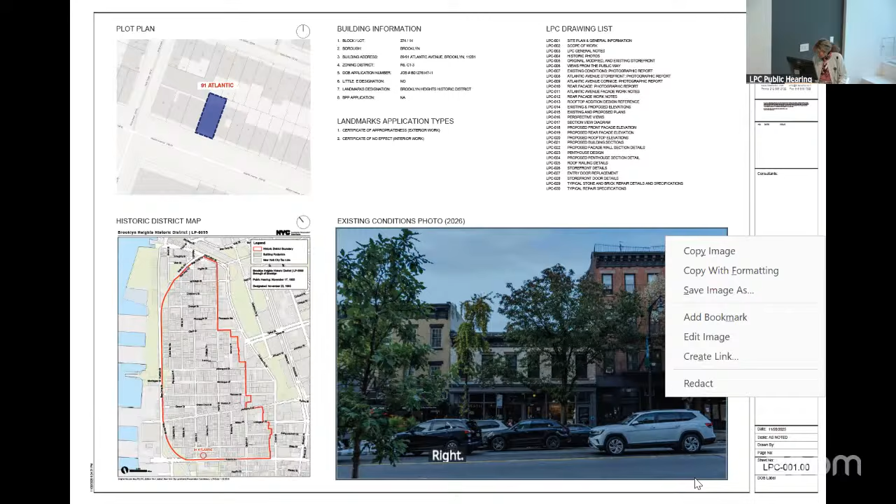So there is restoration of parts of the facade, a new door at the ground floor, certain restoration of the cornice, repairs in the back. All of this has been approved at staff level. And then we have a small addition on top. We'll talk in detail about it.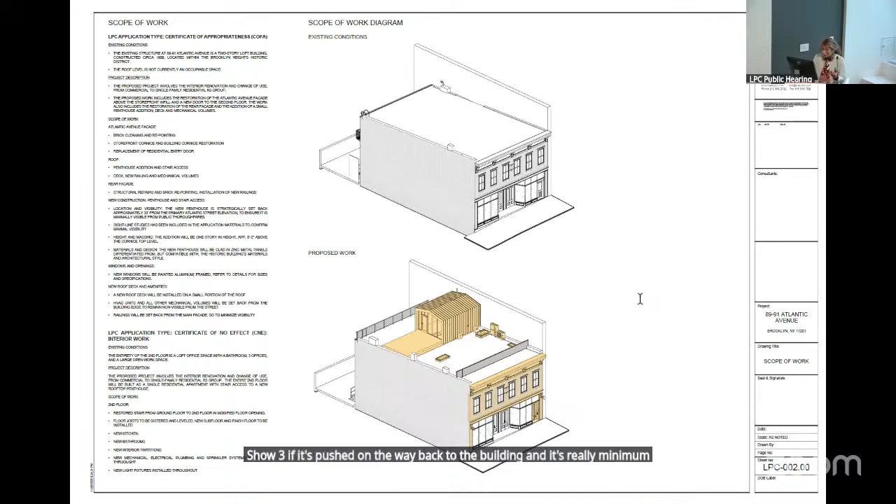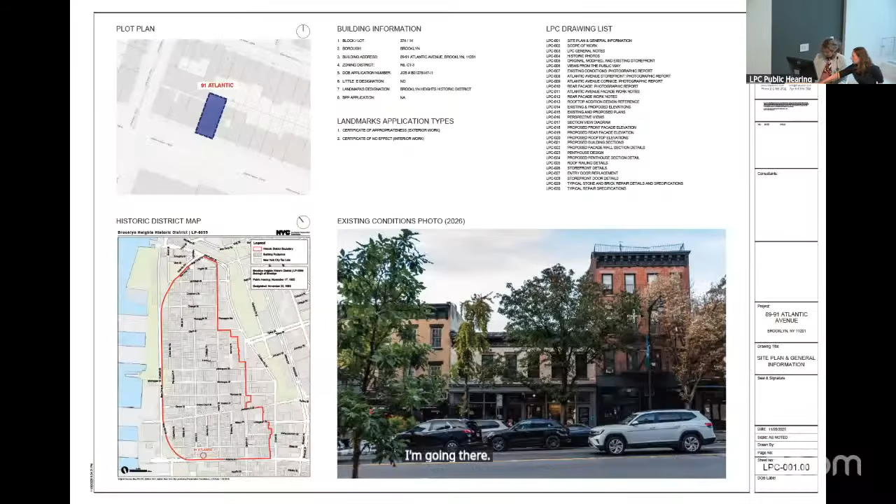So it is pushed all the way back on the building, and it's really minimal. It's a minimal room when you get off from the stair below. Of course, we have a railing, but that is kind of unavoidable.

Okay, this is the historical research, historic photos. The important thing is really that the door that we're replacing was not original. We are doing it, of course, with the help of the staff, in kind with all the doors of this type of building. I just want to draw your attention to the last building on the left of our building, because there were railings on top of this building, even at the time, in the 1940s. So it's kind of an unavoidable element.

These are photos from Atlantic Avenue. They are mainly to illustrate what you may or may not see with the addition later. They are from the public way, from all the usual kind of corners, at the correct distancing below. A view of the facade — again, all the work on the facade has been approved at that level, but we thought it would be important to look at it and look at the conditions. It does need repairs, so the repairs are necessary.

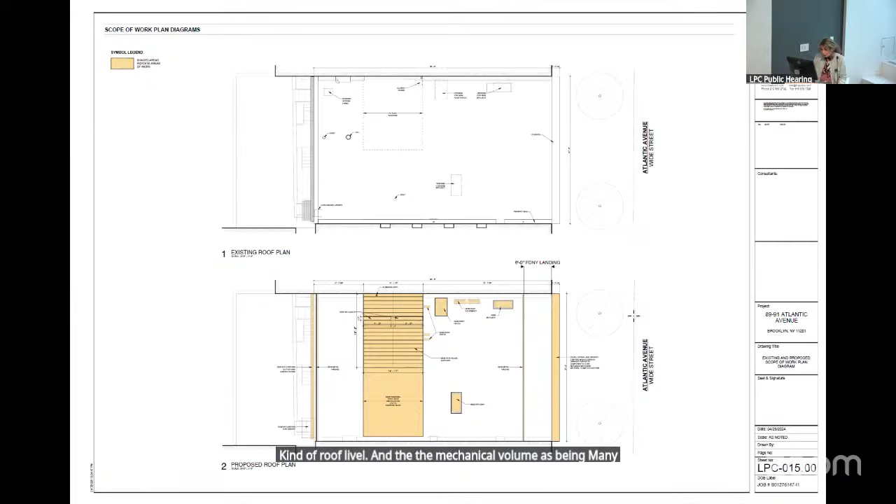Summarizing everything, these are the interventions. It shows the addition at the top. You can also see the rear facade and the work being done to stabilize it. The extent of the work on the roof, where you see the lines with the roof, the rest is deck, so it's at roof level, and the mechanical volumes have been minimized and located as much as possible not to be visible. In fact, they're not.

These are 3D views of the whole intervention. The extent of the addition is shown in the enlarged view. These views are taken from all four points that you saw in the pictures before.

We have a railing located 6 feet from the facade. That is the fireman landing. If it was pushed back further, it would create another unprotected roof, so you would have to put the railing again. So we went through it, and we cannot push it back any further than that.

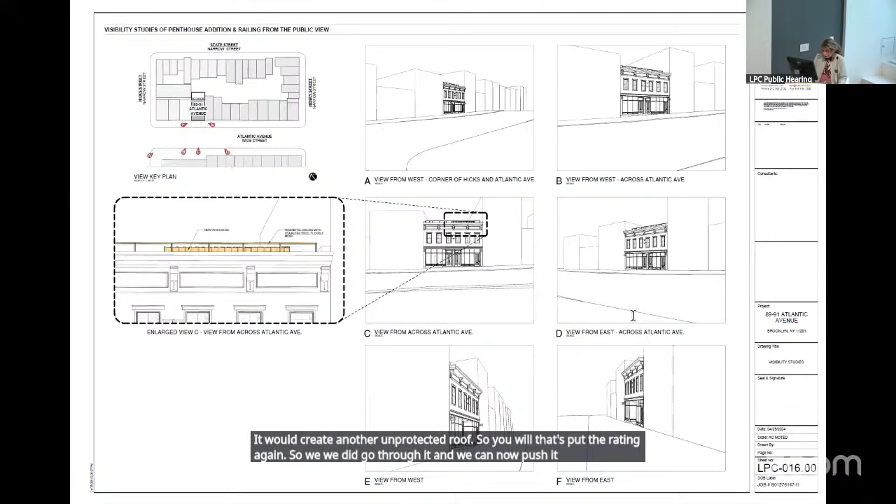These are views of the mock-up with the addition in place and the railing in place, exactly the same as the one you saw earlier. A section of the small addition with the viewing lines from Atlantic Avenue taken from the furthest point, and the railing, showing the distance from the front facade.

These are the actual drawings of this new addition. I want to bring to your attention that we tried to minimize the height. At the side walls, the height of the wall is only 8 feet, so it's really as minimal as it can be. It is clad in standing seam metal with a weathered zinc kind of finish. One side, of course, is glass, but that's not the side that's visible.

A section more in detail with dimensions, so you can see them, but again the height is 8 feet at the side walls. And this also, just for information, shows the interior of the loft and the scale of it, described on the side.

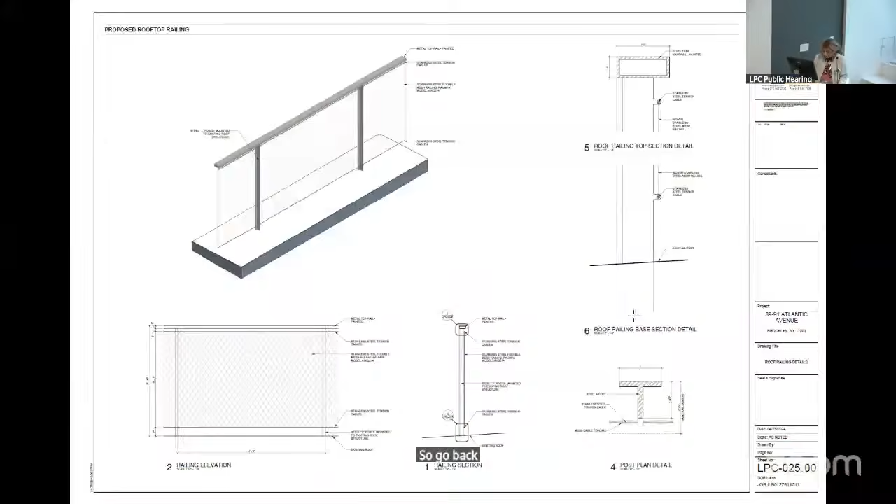Going back to this - one is close to Atlantic Avenue on the curve, and the other is standing all the way against the building, which may never happen. The standard is the most visible line of sight from a 6-foot eyeball height. So it's the furthest back, yes.

They are doing that. In fact, the only reason this is before you is because the staff rules don't allow for rooftop additions that are occupiable to be visible at all. Otherwise this would qualify as minimally visible under the staff rules if it was just a stair bulkhead alone, and the railing comes along with it.

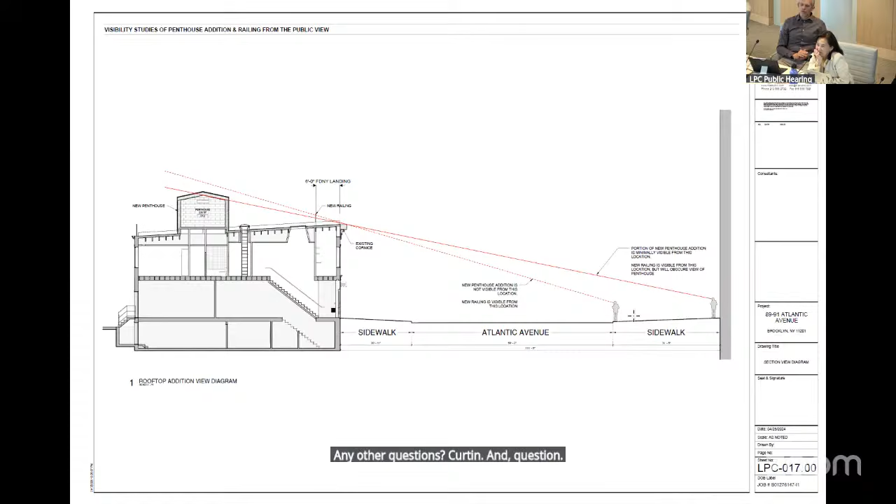Yeah, that's just a rendering, not a standing seam detail. It's a type of cladding that's actually fabricated off-site, it comes in a profile already made. So I actually think it will be very well built because it comes already prepared, and that was in some way a requirement that we had. We really didn't want those lines - we wanted something very well built, very straight, particularly at the corner between the wall and the roof.

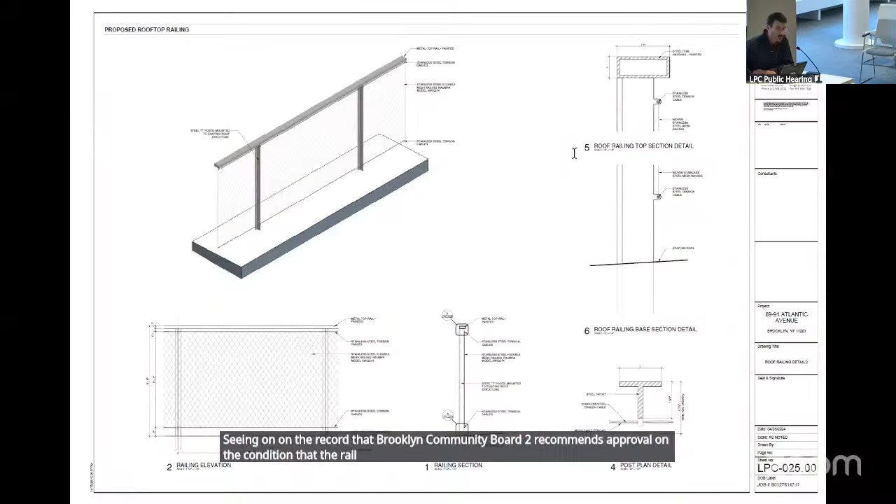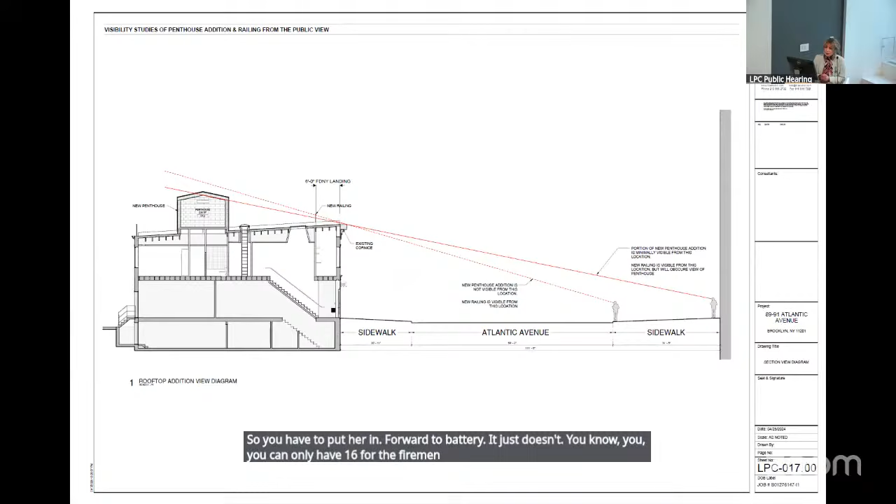Did you want to comment on that? Yes, we did look at it, but unfortunately, if you push it back, you create an unprotected roof. So you have to put the railing forward to that point. You can only have 6 feet for the fireman's landing. It will give a sense to people that that's the end of the roof. If you move it back, they'll walk there.

Thank you. Commissioners, any final questions? Okay, let's go ahead and close the hearing. Commissioner Ginsburg, would you make a motion to close the hearing? So moved. Commissioner Mahan, would you second that? Second. All in favor, say aye. Aye. Any opposed? Okay, the hearing is closed.

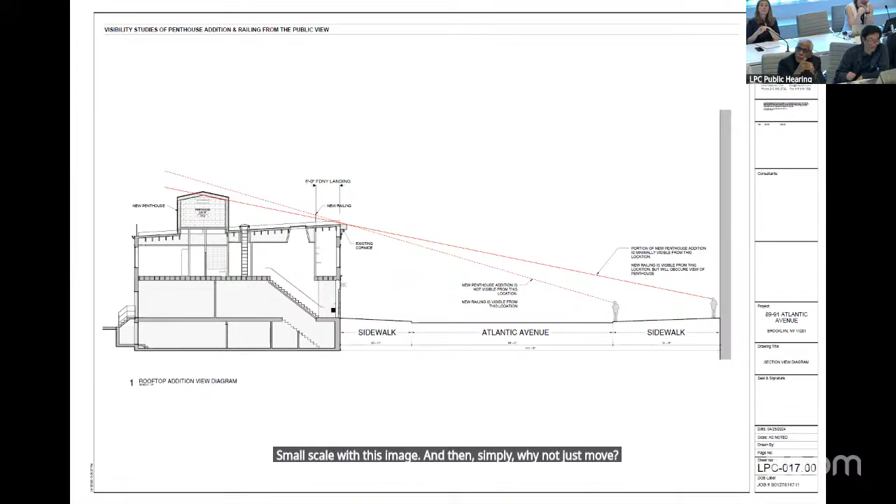Commissioner Jefferson, would you like to start this discussion? I think it's totally appropriate when I saw it before. And then I had these questions that were small scale in this image. And then thought, simply, why not just move the fence back? Why not? And I still don't understand why we can't do that.

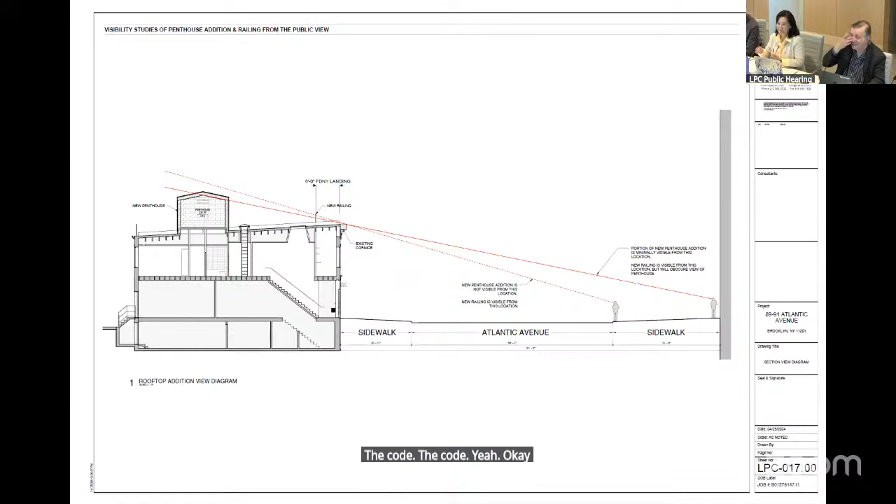Code requires that the fence be within 6 feet of the edge, it can only be 6 feet away from the edge. So they're going back as far as they can legally; that's the code. I can approve this. Thank you. Commissioner Goldblum? Thank you. Commissioner Chen? Commissioner Mahan? Sure. Okay, does anybody have other thoughts?

Okay, let's go ahead and read the motion. In the matter of LPC 26-08-043, 89-91 Atlantic Avenue, Brooklyn Heights Historic District. Application to construct a rooftop addition and railing.

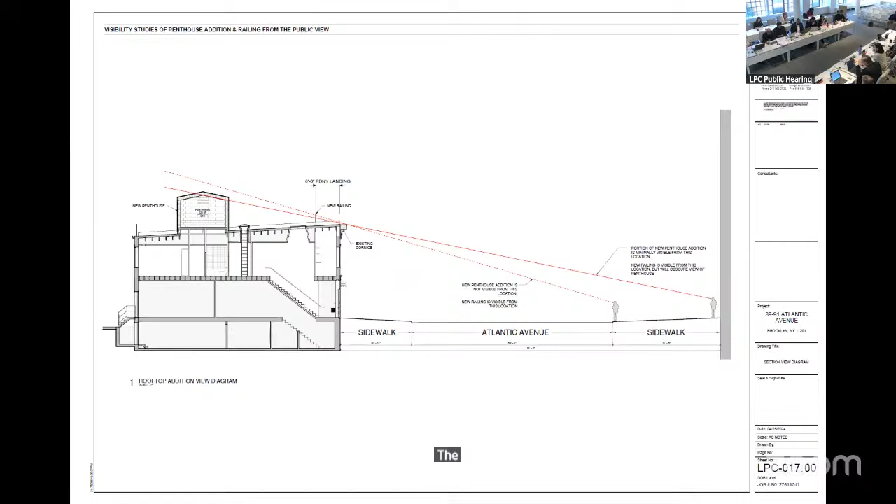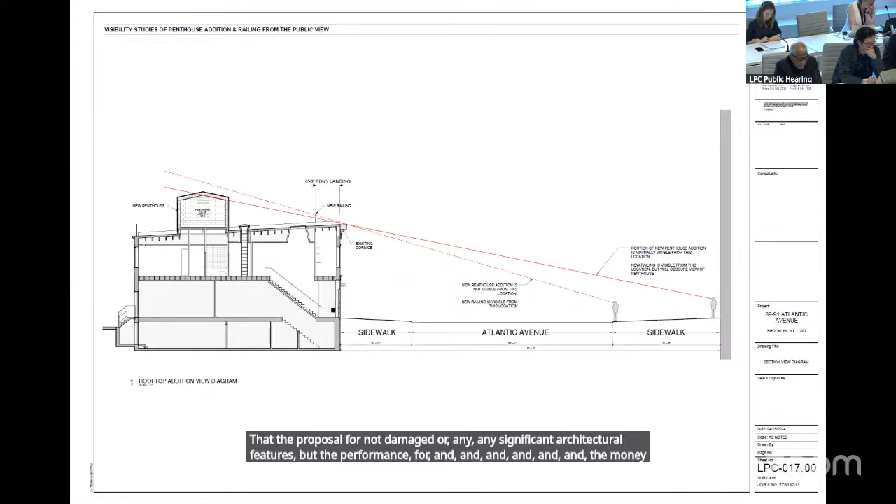I note that the building's style, scale, material, and details are among the features that contribute to the special architectural and historical character of the Brooklyn Heights Historic District. I recommend approval, finding that the proposed work will not damage or eliminate any significant architectural features, that the proposed rooftop addition and railing will only be minimally visible from a limited area across Atlantic Avenue, that the partial-width one-story rooftop addition will be set back from the front facade, maintaining a sense of the building's original massing, that the neutral gray finish of the railing and gray standing seam metal cladding at the addition will help these elements recede, and that the work will not detract from any special architectural or historical character of the building or the historic district.

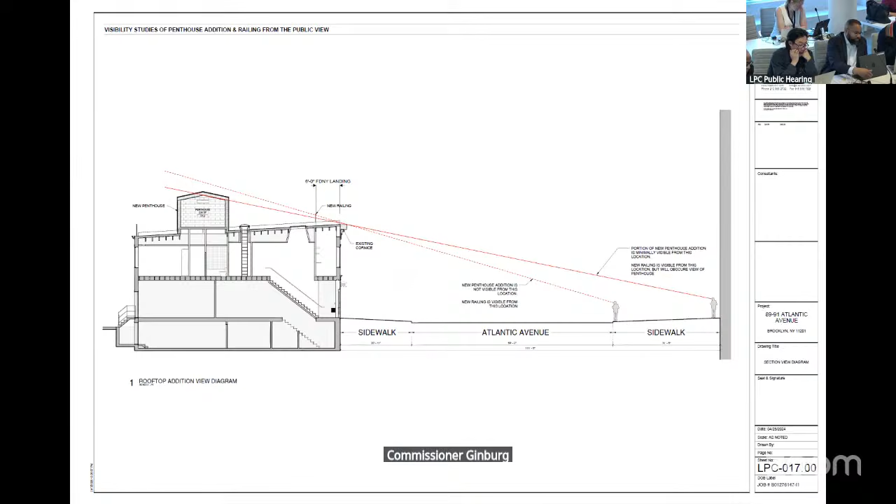Thank you. Commissioner Goldblum, would you second that? Thank you. And Mark, will you call the vote? Vice Chair Master, aye. Commissioner Chen, aye. Commissioner Chu, aye. Commissioner Ginsberg, aye. Commissioner Goldblum, Commissioner Klemberg, aye. Commissioner Jefferson, Commissioner Mann, aye. Commissioner Wilder, aye. With 9 in favor, none opposed, the motion passes. Okay, that's been approved. Thank you.